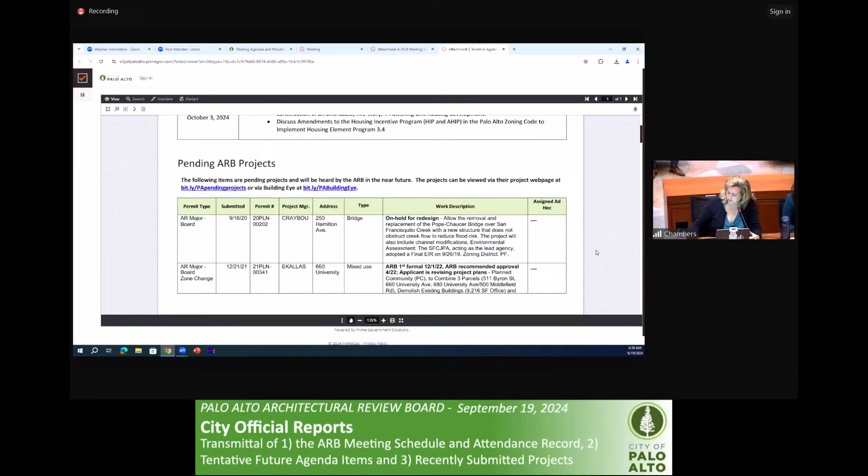On the next page, we have 3150. Again, they have 3 different versions of their project. One of those is a builder's remedy project. And then when you go down to page 9, we have 156 California is a builder's remedy. The next page is 762 San Antonio's builder remedy. So most of these do say builder's remedy in that left-hand column. You also have 3781 El Camino's builder's remedy. The next page, packet page 11, 3606 El Camino's builder's remedy, and 3400 El Camino is builder's remedy.

So we also have 2 projects that have turned in SB 330s, meaning they have frozen the standards for 6 months, and they have the possibility of still filing a builder's remedy. Now, this builder's remedy, the law around that has not been tried in many courts, and so the attorneys are working with City Council to see how we react to all of these individual applications. There could be some different reactions depending on the timing that they came in, because we do have our housing element that was adopted by council April 15th of this year, and then also certified by the state August 20th. So staff and the attorneys are working through that process right now.

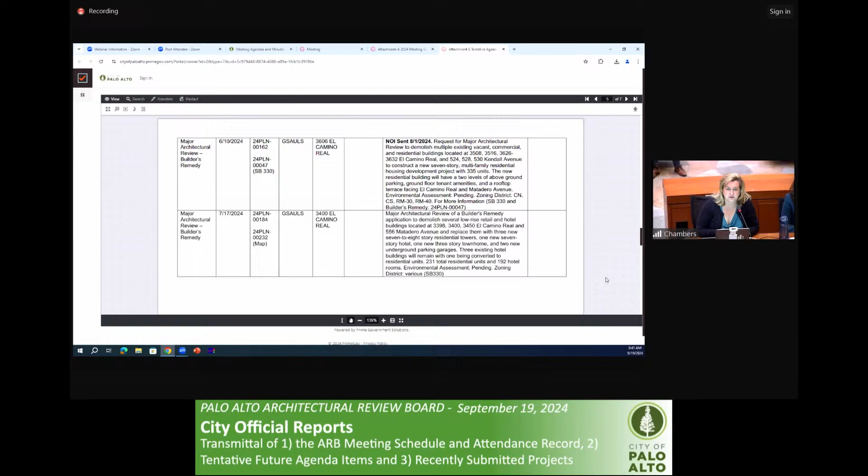That is, I don't believe we have any newer projects. So that's the main official report at this point. Unless there's any vacations or anything like that coming up that you need to let us know, please do so. Thank you. And looking ahead to the winter months here, does anyone have anything that they can anticipate in terms of travel time on the board? Okay, nothing at this time. We'll circle back later, of course.

All right, at this point we will move on to action item, item number 2 on the list. It's 4335 to 4345 El Camino Real. Request for streamlined housing development review to allow the development of 29 3-story attached residential townhome condominium units and associated site improvements on 2 non-contiguous lots. Project would replace existing commercial and motel uses. The project includes 4 units at below market rate and accordingly requests waivers and concessions pursuant to the state density bonus laws. A compliant Senate Bill 330 pre-application was submitted January 24th, 2024.

And we will turn this over to Emily, but first of all, we'd like to go over disclosures. So does anyone on the board have a disclosure they'd like to make?

I'd like to disclose that I visited the site yesterday. Visited the site also, not yesterday, day before. I visited the site as well this week, and we did also receive 2 letters in regards to this project via email just the other day. I disclose I wasn't able to visit the site in person this time, but I passed the site frequently, and also I did the Google Street View this time.

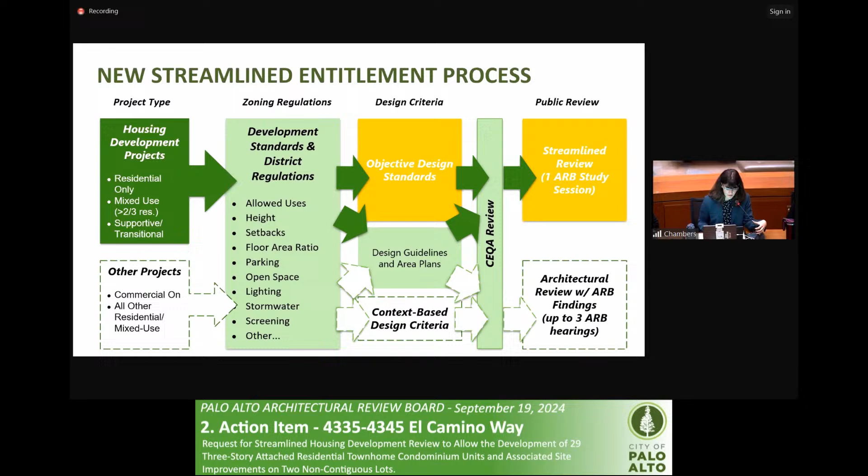This means it qualifies as a housing development project per the state definition, and as long as it meets the objective design standards adopted as part of Palo Alto Municipal Code Chapter 18.24, it goes through the necessary CEQA review. This is the one ARB study session to receive feedback to help the plans with the waivers requested to meet the intent of the objective standards. After this, it is approved as a director's decision.

In terms of the process up to this point, the formal application was submitted in May 2024. It has since gone through 2 rounds of staff review, and a third is anticipated based on the comments received. We're at the ARB study session, and public comments are accepted at public hearings at any time throughout this process.

This project is located on 2 parcels at the intersection of Cesano Court and El Camino Real. Both properties are in the CS Service Commercial Zoning District. The property is essentially at the city boundary with the city of Mountain View and the town of Los Altos. The neighborhood contains other 2 to 5 story multifamily and hotel buildings.

One item I wanted to point out while looking at the vicinity map is where trees are shown at the rear portion of the 4345 property, the larger property. There are 2 pockets of trees which are considered common open space for the condominiums across Cesano Court here. These 2 pockets are not part of this property, which will be more clear on the site plan.

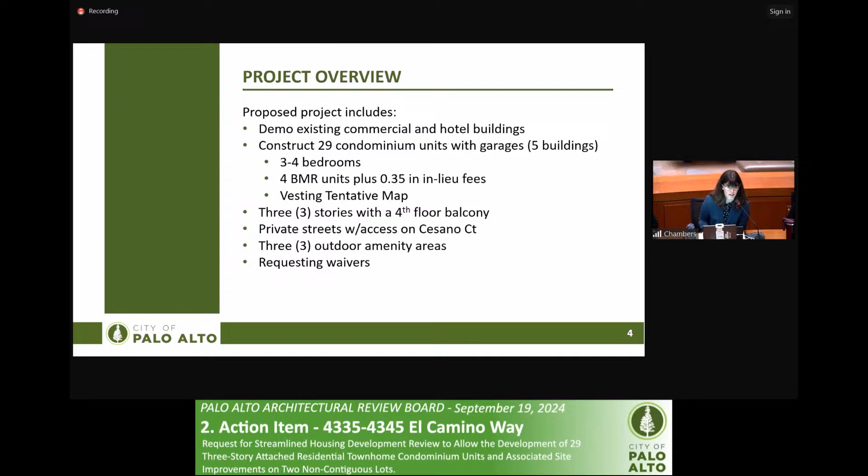The townhomes are 3 stories with a 4th floor balcony deck area for usable open space. The units are accessed along new private streets accessed from Cesano Court. The project also includes 3 outdoor amenity areas, and as a streamlined housing project using state density bonus law, the applicants are requesting waivers to deviate from some of the objective design standards.

Again, this is the site plan showing the 8 units on the smaller side and the 21 units on the larger side. It also shows the shape of the properties, as I was trying to explain earlier.

To give a quick overview of the floor plan and elevations, I'm only showing the largest of the buildings. This is the 8-unit building, showing units having a mix of 2-car side-by-side and tandem garages. The second and third floors have the primary living spaces, and above there are usable open space balconies. These are not considered roof decks as far as the zoning code defines them.

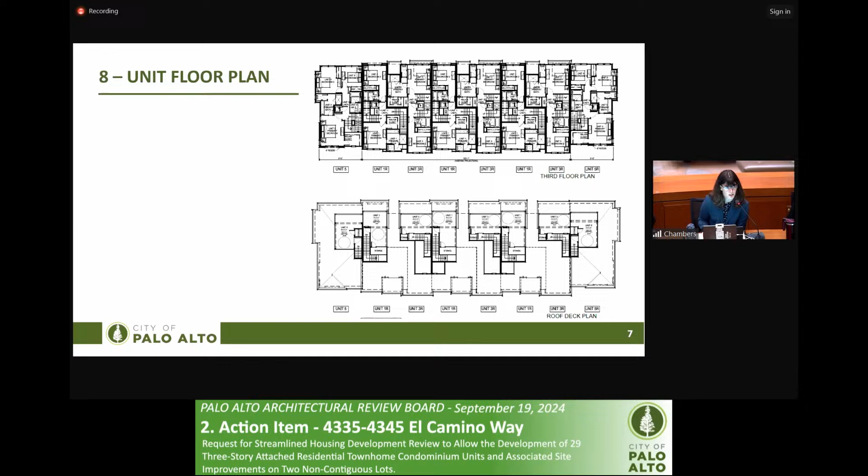This shows the elevations. It meets the base, middle, top, the materials objective standards, as well as the vertical and horizontal shifts.

Three different color schemes are provided for the five different buildings to also provide differentiation.

The key considerations for this project include conformance with the objective standards, and the use of waivers, which are allowed when conformance with the code would physically preclude the construction of the proposed units at the proposed density. However, this project is also eligible for one concession, which is allowed for something that would reduce either the building or operational costs of the project.

As far as our review, because we are still in process, there are certain items that are not currently being met in the plans and are not currently being requested through waivers, but these could either be addressed through requesting additional waivers or by making changes to the plans.

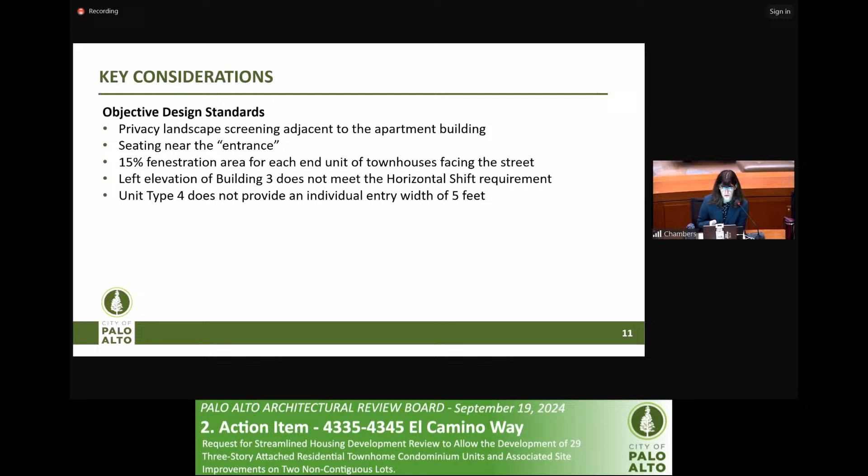This is the list of the waivers requested by this project. The first is to provide no retail or retail-like uses, where some retail would typically be required as part of the retail preservation ordinance.

We have determined that this would not be eligible for a waiver because it does not preclude the proposed density. However, it can be requested as a concession, and that is reasonable for this project.

Next, there is a waiver requested to reduce the side yard setback adjacent to the condominium common space. As I was explaining, some of the trees along Cesano Court that are in a pocket parcel not part of this property would need to be reduced from 10 feet to 4 or 8 feet.

Next, to reduce the rear setback also adjacent to that condominium common use parcel from 10 feet to 0 feet for the refuse accessory structure, and then 8 feet for the actual townhome buildings.

Next is to waive the 30% build-to-line development standard along Cesano Court. There are a number of items along the right of way, essentially the transformer, fire backflow preventer, as well as the driveways, that seem to preclude the ability to meet this standard.

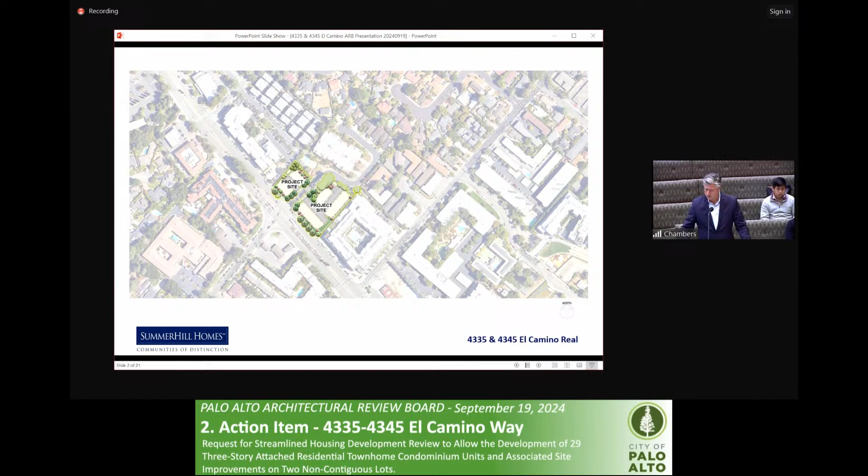It's a contemporary style that combines pitched roofs and classic materials with warm colors that complement the landscape and surrounding context. We've configured the buildings, importantly, to provide an activated, pedestrian-friendly street presence along El Camino and Cesano Court. The front doors and ground level patios face outward toward the street. Vehicle circulation, as Emily mentioned, is provided through 2 entry points from Cesano, and each unit will have its own attached private 2-car garage.

The bike storage for the residents will be in the garages, and there will also be guest bike parking throughout the site on both of the parcels. I want to mention that the private streets will be 32 feet wide, which is wider than you see in a lot of other cities, but that's in compliance with the city's requirement. We did not request an objective standards waiver for that. We'll also have trees planted between the garages to provide some greenscape on that side of the building. All the units will have private balconies and roof decks.

As I said, overall, the idea here is to develop a contemporary urban suburban type of community that fits well with the range of residential densities in the area. Jennifer, if you wouldn't mind coming up and adding a few words about the architecture.

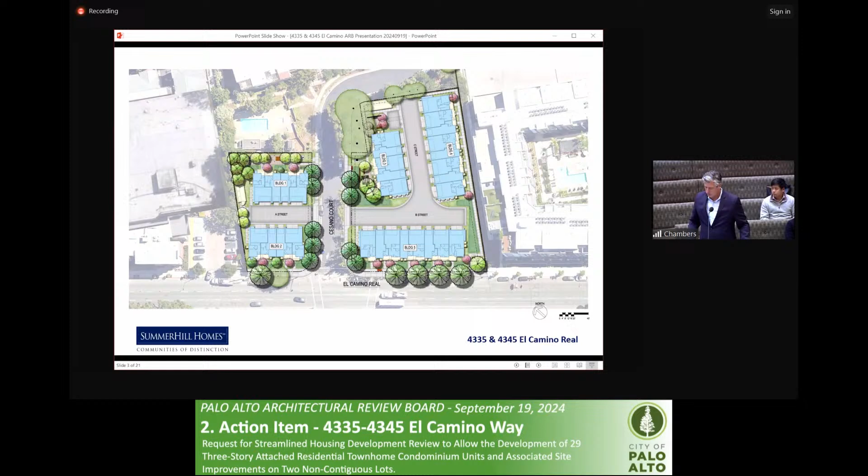Just sit right there. Good morning. My name is Jennifer Master with SDG Architects. Thank you.

As John noted, the townhouse has been designed in the contemporary architecture style. We have used variations in the roof line and massing to provide overall visual interest and human scale at the street level. As viewed from El Camino, you can see the variety in the roof that we have, including hipped roofs, shed elements, and faux dormers at the upper level, again to provide that additional articulation to the street scene.

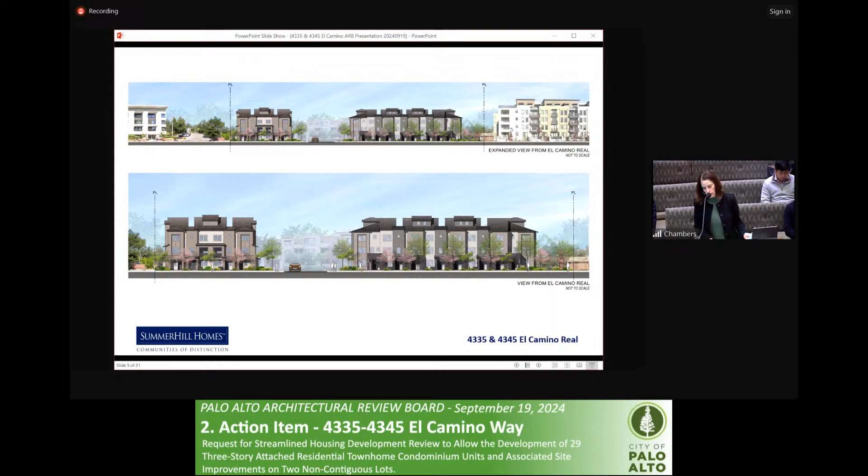The front doors face onto El Camino to engage with the public space, and the front stoops are set back at least 15 to 18 feet to allow for private residential entries. There will be landscaping between the entries and the public sidewalk along the frontage. We will plant public trees along the edge of the sidewalk as well as private trees on-site between the sidewalk and the homes.

The two images on the screen are viewing from Cesano on either side of Cesano Court. Again, you'll see the similar variety in the roof, with breaks in the roof plane and the articulation of the architecture. We have used complementary color schemes throughout the project, as Emily pointed out previously, as well as architecture that engages with the public space.

Here we have the front elevation of Building 5, one of the 8-unit buildings. We have a complementary mix of high-quality exterior finishes, including plaster with 20/30 light sand finish, 8-inch smooth fiber cement siding, smooth fiber cement panels, and brick veneer at all the entries, providing different levels of articulation across the elevations. Our roofing will be composition shingle roofing, and we will use steel and wood railings for the balconies and decks. We will also have wall sconces at the entries. Again, our intent is to combine simple but refined materials with contemporary roof forms and building massing to develop an urban suburban style. With that, I'd like to ask Roman from R3 to talk about our landscape architecture.

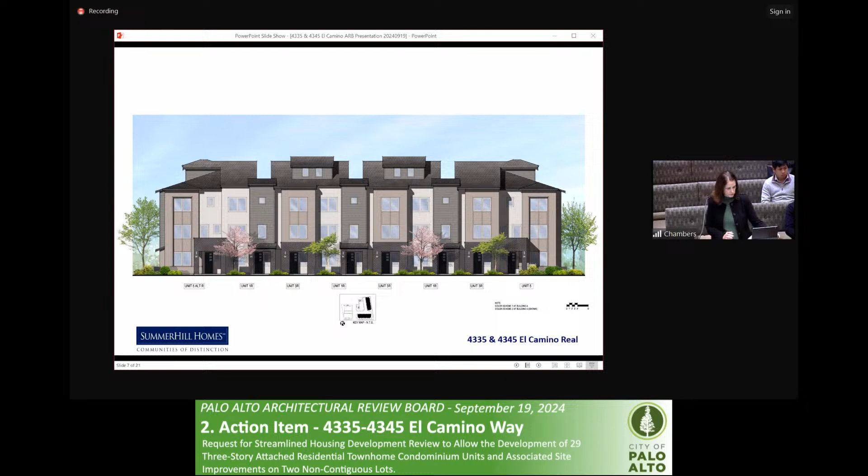Good morning, Roman DeSoto, R3 Studios Landscape Architects, as evident by my green suit. I did want to talk a little bit first off about our proposed plant palette.

One of the things we do when working on a project such as this is try to find a good balance of native and non-native species, low light tolerant species of plants, but also plants that are low water use. We understand maintenance as well, and we're trying to avoid having plants trimmed into hedges and globes and giraffes and things like that, so we try to think about those kinds of things after the fact as much as we are initially. Also screening of the sides of buildings, screening to provide shade, screening to provide undesirable views, and then of course the retention areas. There's an image on one of your sheets about how we look at that and try to make it actually look very presentable as opposed to just a leftover space. Those are important things when thinking about plant palette and how we want to see native and non-native species work together.

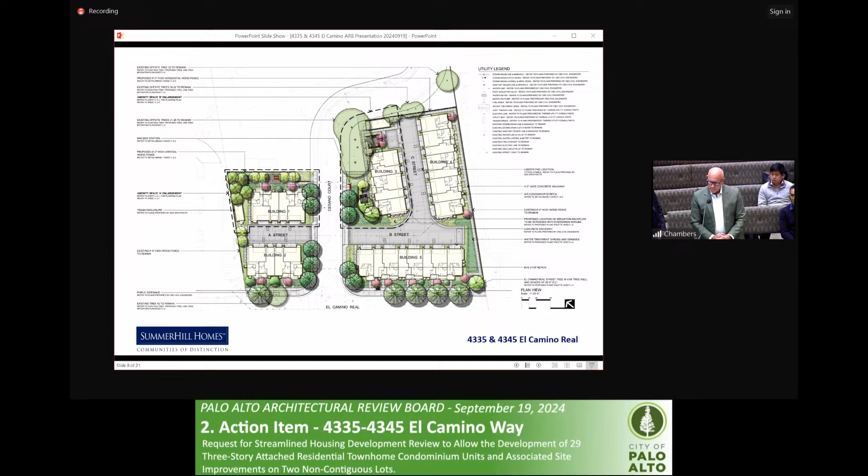The first thing I'd like to talk about, in addition to the plant palette, is the amenity space next to Building 1. In this space, we tried to create a small outdoor area that has several uses, enhanced by a textured treatment of concrete, an electric barbecue counter, a communal table, string lights, and a conversation area with a table. In and around that would be a lush planting of native and non-native species. We understand this portion of the site may get a little bit of shade, so we're very cognizant about what types of plants we would propose in this area.

The second amenity space next to Building 3 faces Cesano Court. This is an area with a pergola, seating area, tables, modern Adirondack chairs, and lounge seating. Out in front, we're proposing some specimen trees, such as native California oak trees.

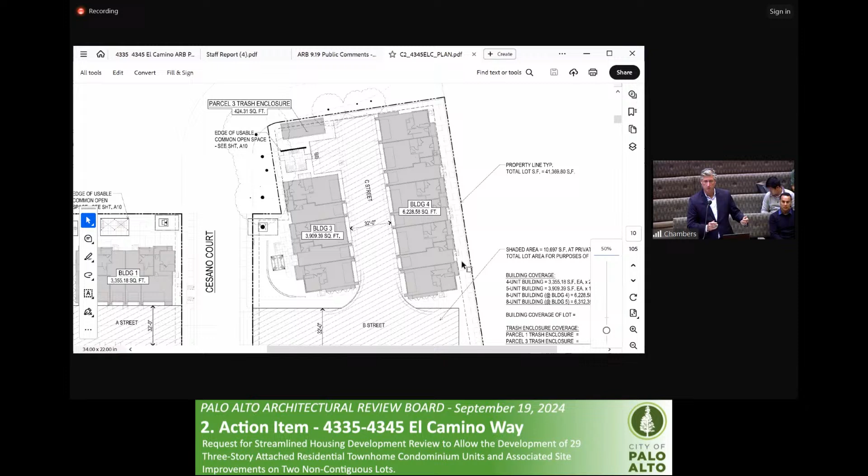Certainly, give me a moment to pull back up the shared screen, but I can answer in the meantime. It's actually an ordinance requiring 32-foot wide private streets in Palo Alto, and the measurement is taken from face of building to face of building, not the travel way itself. That 32 feet includes the driveway apron or garage apron. So on that note, is there a sidewalk along there as well, or is it decorative paving? It's not decorative paving, and it's not intended to be a pedestrian route there.

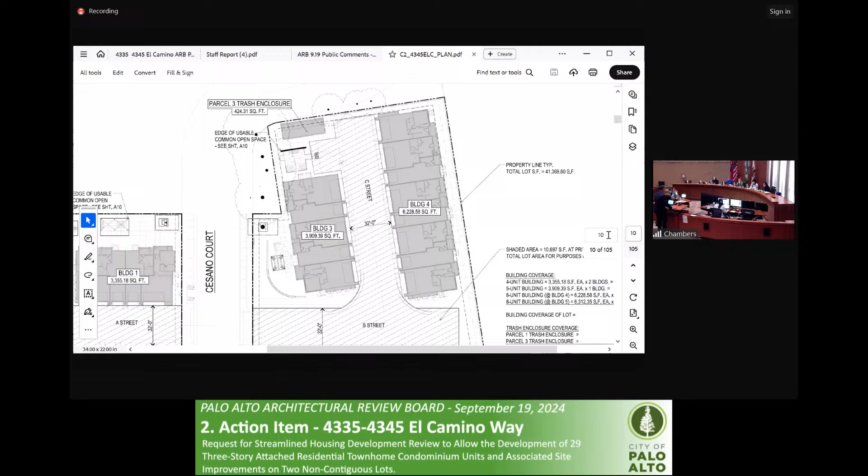Sorry, give me just a moment, I'll see if I can pull that up. Emily has it up on the screen already. Oh, great, feel free to point out what we're talking about here. Actually, if you could go to sheet L1.1, or an even better sheet, it's hard to say, I'd bet somewhere around sheet 80.

These are the street sections. Yeah, that's fine too. So this is actually taken from the joint trench sheets. Were you able to find that helpful? Yeah, actually that was pretty helpful.

The intent here is that the front door is faced on the opposite side from the alleys and from the garages, so we want pedestrians to think of the front door as the pedestrian side. The streets will be 32 feet wide building to building, but there's not intended to be a pedestrian side of the building because there isn't a pedestrian entry on that side. These are not designed as what Mountain View calls townhomes, where the garage and front door are on the same side of the building.

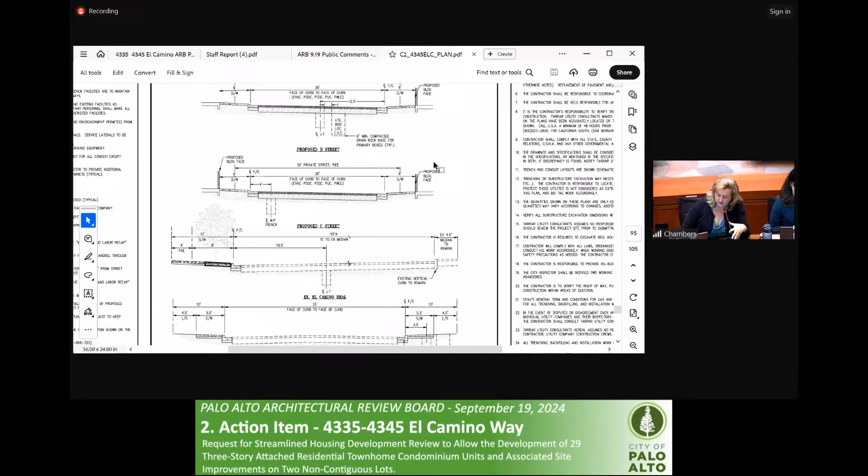Can you repeat what the requirement is? The requirement's coming from the code for private streets, and this was a voter initiative that was put into the code. It says that streets serving 5 or more lots shall be no less than 32 feet wide. So it's just meeting code, not planning asking for anything more. Okay, thank you for clarifying that.

May I ask, I think staff's interpretation has been that 5 or more lots includes condominium units, because we're actually just 2 single lot subdivisions here, technically, with multiple condominium units on each.

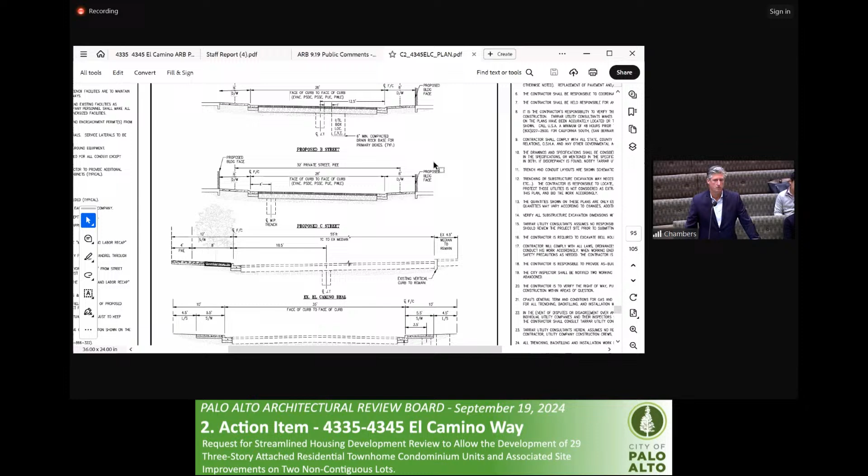Regarding the condominium, I have a related question. I have not seen this kind of jigsaw puzzle setup of plans before. It was very interesting, so thank you for doing that. But it seems like 2 units have stairs that are kind of stacked. How does that work? This isn't really a planning question, just for my education, but how does that work in terms of lot split in a condominium or townhouse?

Well, the condominiums are defined by the condominium plan, which is basically an airspace condominium. In that sense, it's no different from a stacked flat condominium where you have multiple levels of units over each other. For the most part, because there's a lot of demand for this townhome style of living, where nobody lives above or below you, we try to keep them side by side as much as possible. The reason we have this slight overlap in the stairs is actually to accommodate Palo Alto's specific requirements regarding the amount of space needed for bikes and other storage in the unit.

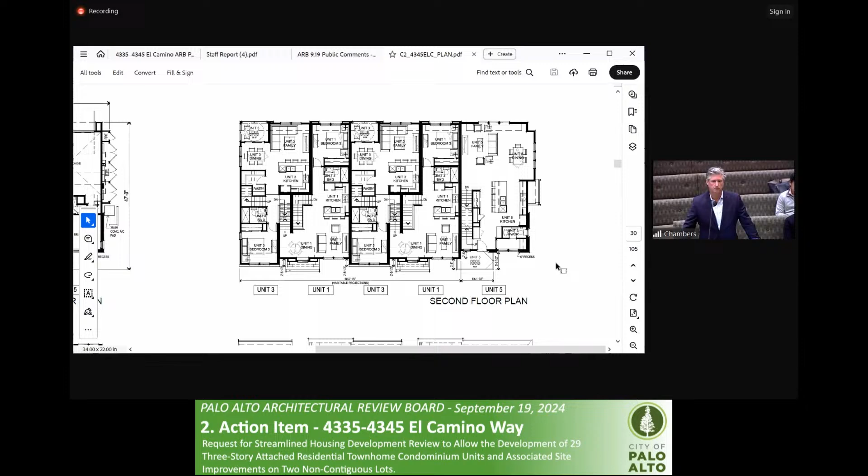So legally, it's going to be a condominium, not a townhouse. Got it, exactly. And that's why I mentioned it's technically 2 single lots, but each individual unit is defined by a condominium plan, which will be developed. The way the process works, it gets developed during the improvement plans and building plans, and gets reviewed by the Department of Real Estate. Sounds good, thank you. I have many other questions, but I'll hold for others to ask theirs.

Sure, I'll jump in here for a moment if you don't mind. Emily, would you mind pulling up the site plan, please? Beautiful. So I wanted to go over some of these waivers that we are looking for. So the concept of the retail and no retail.

Understand that. So the one thing I didn't understand is it does seem that with a townhome style of architecture, it would preclude additional units. Isn't that correct, though? So I'm wondering why it wouldn't work as a waiver and we'd have to make it a concession instead. I just want a bit more clarification, because I'm thinking the waivers would make it so you can't build the density you're looking to build, but with a townhome, you can't have the whole first floor be retail, because that would preclude the amount you could build. Is that correct, or am I misunderstanding?

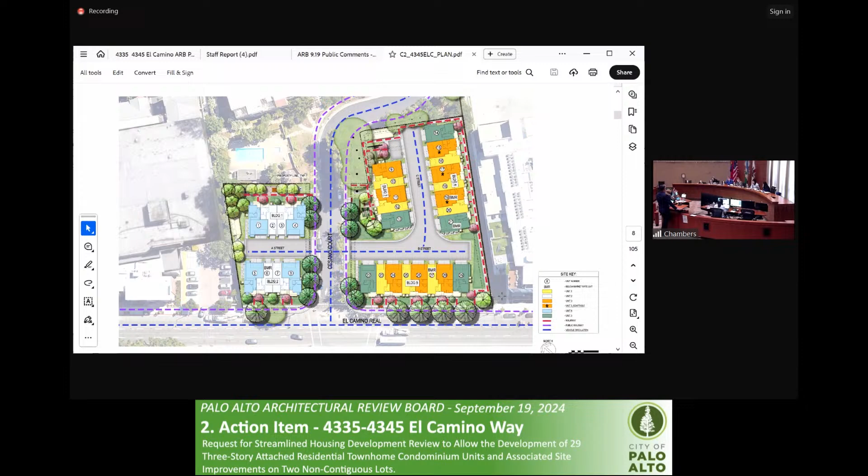It's my understanding that it is the density, the number of units, rather than the architectural style of those units. Okay, so it would be possible to waive the retail under a concession, and they're allowed to have one concession. Yes. Perfect, okay, waiver number 2, side and rear setbacks.

Just to dive into this a little bit, something I noticed, and I don't know how to zoom in here, but I'm going to do my best to draw all over your thing here. So part of this is that the setback is reducing the side yard adjacent to the condominium use from parcel, from 10 feet to 4 feet 8 inches. That's on this side here. I realize this isn't the site plan that has the dimensions on it, and I should be on this page. Perfect.

I just want to go over these setbacks, because it felt a little confusing when we were talking about it. This here, the trash, is looking to avoid the setback, but it's a low structure at 6 to 8 feet tall, versus this condominium only asking for a 2-foot concession. So the tall building is here, but this one, the trash, is the one that wanted to go to the 0-foot setback, and that's at waiver 2B. Is that correct? Yes. Okay, perfect.

And then 2A, sorry, I'm jumping around a little bit. It's to the left here. So this one, just for this portion right there, would be reduced back, and it really is the front porch. Actually, right there it's the 4'8", and that's to get to the front porch. Is that correct, or is it coming all the way down here? Yes, it extends just slightly further than where you had drawn that. No, yeah, that's correct. Okay, and on that note, the reason that's 4'8" is because of the street on this other side, so that all makes sense.

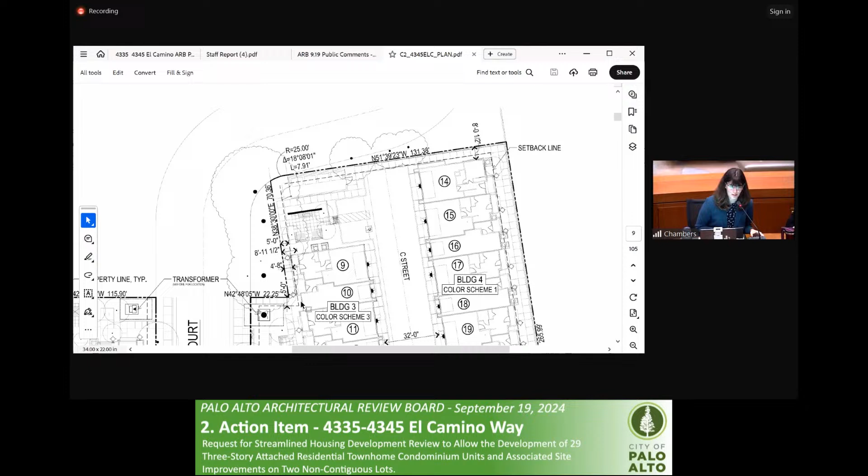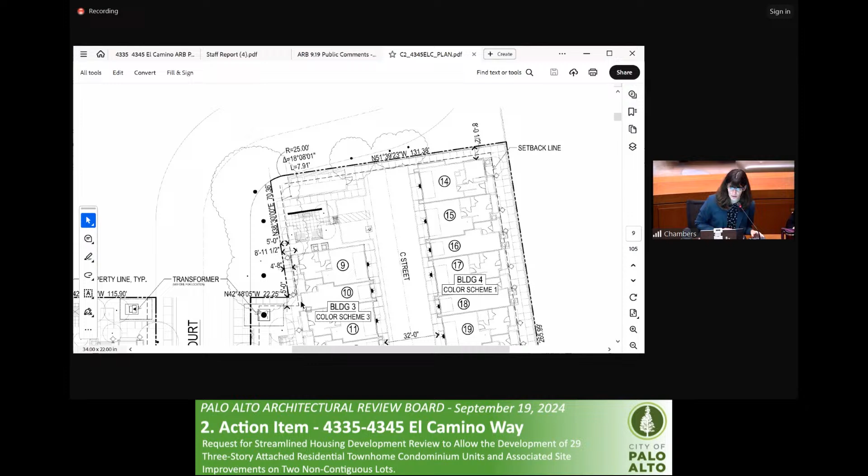Got it. Is there any possibility that in the future those two slivers of parcel could be sold independently? It's my understanding that it would require unanimous approval of all the condo owners. It would also potentially bring the project out of conformance for their usable open space requirements. I haven't looked into that. Not a problem. So just in the foreseeable future, that will always remain landscape. So having a 4'8" setback here is really from a landscape sliver of an undevelopable property.

Yes, there is a fence there, so that is something to keep in mind. Chair, may I interject for just a moment on that point? Please, go ahead. So the fence is actually part of our site, so that would come down. And yes, we've looked at this issue. Not only would it raise the issues that Emily just mentioned, but it would actually require a subdivision map or parcel map to create that as a separate legal parcel, and it would be a non-conforming parcel, so you wouldn't actually be able to create it as a separate parcel for individual sale.

Got it. So the only property that would ever want to buy this sliver would be you guys. Yes. Okay, got it. Still staying on the subject of these setbacks, so that's there, okay.

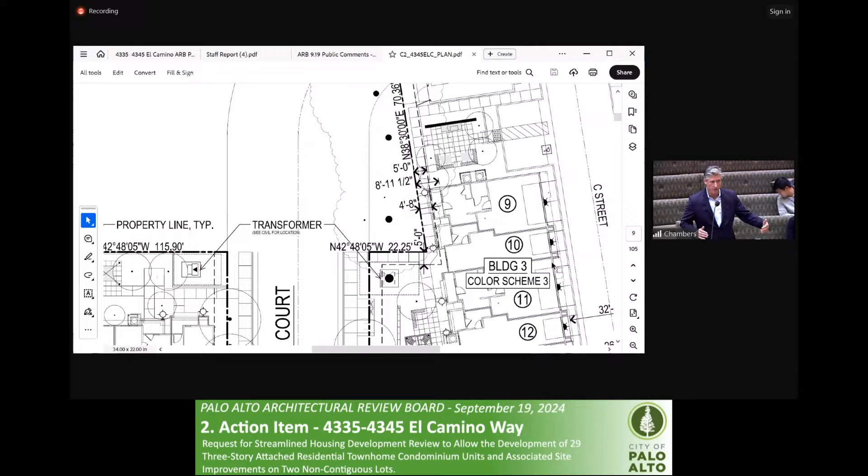And then the large bulk of this here does appear to be at that 8'11". Is that accurate as well? So as the building steps back, does it get up to this 8'11" here, or am I misunderstanding that? I'm looking at the applicant now. You're looking at which portion? Thank you for zooming in, Emily. So it's got this 8'11" setback here, and I'm trying to understand where exactly that's going to. Is that the sort of bulk facade of that building? I'm going to look to Jennifer on that because I think she's checking the plans right now. But yes, I believe that's the case. So what you're seeing there for the 4'8" is the ground floor, the stoop, but then the second floor and third floor are stepped farther back.

Okay, thank you. Let's see, and then Emily, I'm going to jump over to waiver 3, that 30% build-to. Could you please explain that one a little bit more for me? I want to make sure I've got that covered.

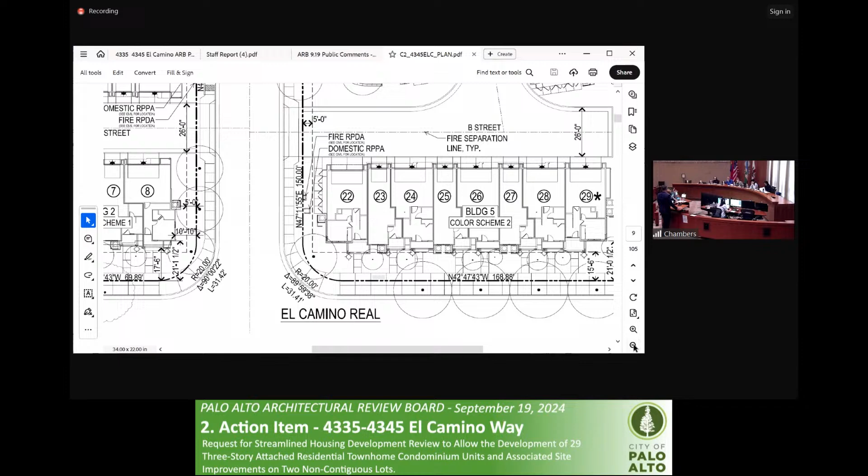Yes, I'm moving the plans around.

Along Cesano Court, for this property on the right side, normally there would be a 30% build to the setback. But on this side, the amenity space is here, then the driveway, and then there's fire and other equipment, the transformers too, all over here. That's in the way. Probably better to have that on a streetscape than tucked somewhere on the private street.

Again, on this note, if you scroll back up just a bit so we can see the end of Street C. So there's no possibility for driving through here because that would cross this little area of land right here, so this could not be a through street. It has to be a dead end.

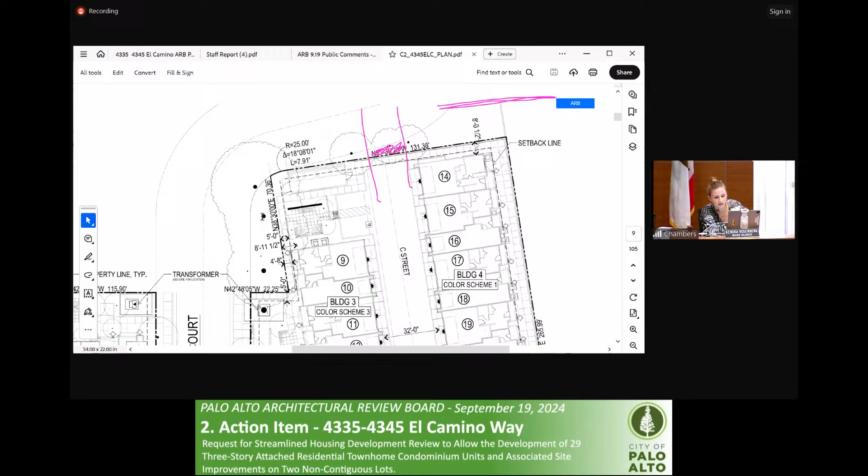Correct. And on that same note, there's a bike path coming from somewhere over here, which was mentioned in public comment, that they would like to see this bike path here. But that property is not owned by this applicant, correct? Correct. So both of those are out.

Just a second. About that through street, you mentioned earlier that the fence is part of this property. Did you say it was going to be removed? Was the pedestrian part of that going to be accessible from Cesano Court? No, I believe we'll be installing a new fence along there.

I think we have a sheet that actually shows the fence line. If Austin, if you're able to find that in the plan set, we can reference it. So that, because of that proximity on the front of building 3, we don't want to build a new fence there, because that would be a fence right outside your front stoop. But we will have, for privacy and safety, a fence along the, I'll call it the north and east side.

And it will end in the upper left corner? Yes, that's right. The fence will extend essentially over to just about where the trash enclosure is. There's actually a very small portion of our site that does have frontage directly onto Cesano Court - that little tiny bit there, which works well because that is going to be the pullout location. We've talked to Waste Collection about this - that's going to be the pullout location for the bins that are in that trash enclosure.

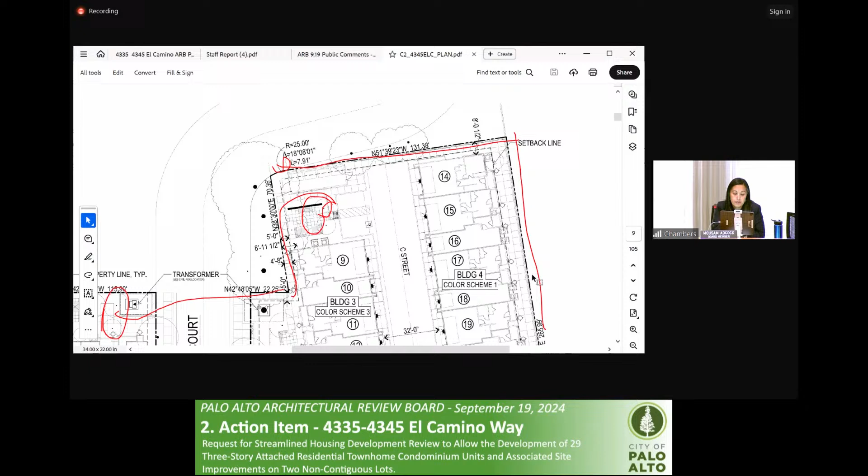Part of my line of questioning here is about the shared amenities you mentioned at the end of your presentation, the outdoor spaces, because on the two properties they're similar but a little bit different amenities. So presumably people living on this side could cross over and use that barbecue area, kind of jaywalking across the little court? Yeah, that's exactly right. It'll be a single HOA serving the entire project, but because of the separation of the public street in the middle, we wanted to make sure both sides of the street had some on-parcel amenity spaces, though they're welcome to use the amenity spaces on either side.

In fact, the mailbox kiosk is located on parcel 3. You might wonder why I keep referring to parcel 3 rather than parcel 2 - it's because the parcel map that created these parcels defined them as parcel 1 and parcel 3, so for consistency in my mind, I continue to refer to them that way. Thank you.

Just a quick question on trash collection - you mentioned on parcel 3 the trash bin will be pulled out from that corner. What about parcel 1, because it's a little bit further? Yeah, great question, so let's go over to that for a moment. We've actually had extensive discussions with trash collection services about this.

So what we're doing here is we've got the trash enclosure, as you can see, and the carts will be pulled out, the bins will be pulled out and taken to the street. There's actually, just to the side of building 1, a couple of hashed marks - that's the ADA marking there, because there's a little ramp down so those bins can be pulled out and put onto the street right there. And the HOA is going to be paying an additional pull-out fee to Waste Collection to pull those out and then push them back in.

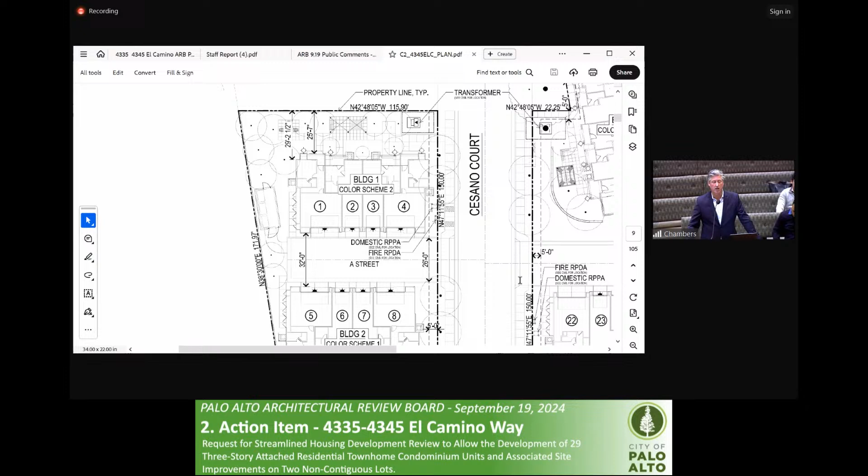For townhome and for-sale product, it's very different because you don't have on-site staff. You have an HOA manager and a landscaper that's hired, but the landscaper isn't there every day. In the past we've preferred to let residents keep their bins and carts in their unit or garage, then pull them out for collection right in front of their unit. But the city isn't allowing that anymore, which is why we're doing the trash enclosures.

Thank you for the clarification.

The last two waivers I want to go over as well. Waiver 4 is a waiver or reduction of development standard to reduce the number of street trees. I'm looking at the landscape architect here — can you explain where the street trees are that are being added, and why you think you can't get those last few in? Come on up.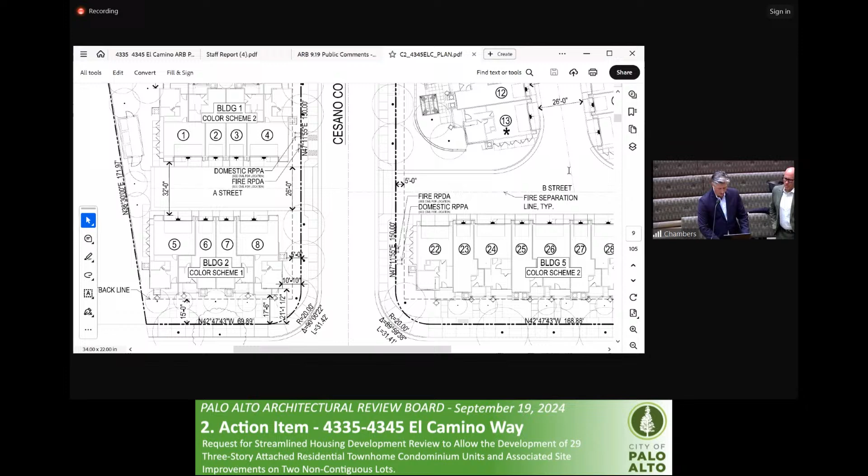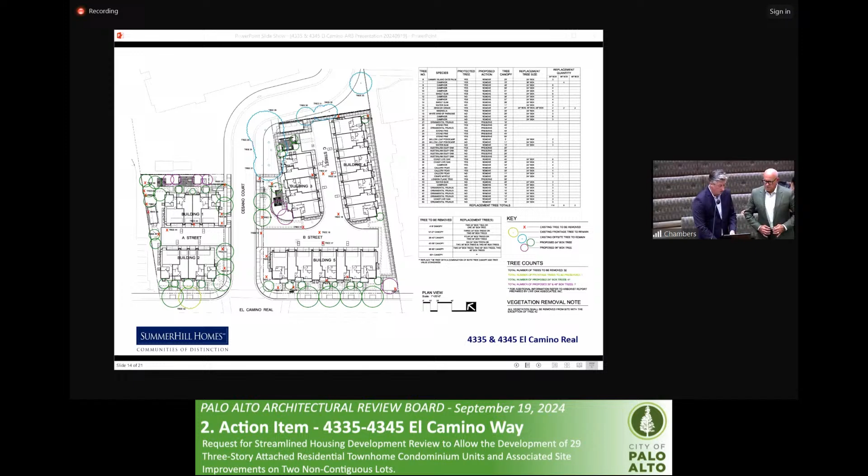I can help with that too, because I've actually got a slide that'll help illustrate that. Do you mind if I share my screen for a second? Please. Why is that not sharing? There we go. Okay, give me a moment here. I'm going to scroll down — one sheet we want to see is this one. Or even the colored, rendered ones. Yeah, that's fine too, we can go to that.

The easy answer is that due to the amount of utilities, but also the water treatment area and the storm drain line that services those water treatment areas, especially along El Camino — those small purple trees there are pushed back to clear the storm drain line. We were hopeful we could push them forward to count as street trees, but based on the impacts that treatment area would have closer to the building, that wouldn't work.

We tried to fill in as many spaces as possible with street trees, so we're counting some that may not look like street trees. The one to the far right in that lower corner is 6 feet within the sidewalk, so we're counting that as a street tree. Everything else along Cesano, those larger green trees, those are street trees. And of course we're saving the one — I believe it's a platanus — out on El Camino in front of building 2, and adding another one there. Street trees along that area are at about a 25 or 30 foot spacing, so we've done our best to avoid existing utilities, street lights, etc.

To clarify, that is one additional tree. At the time the staff report was published, we weren't sure if the one in the bottom right corner was 6 feet away from the sidewalk or not, but now that it is, the deficit is 4 trees rather than 5.

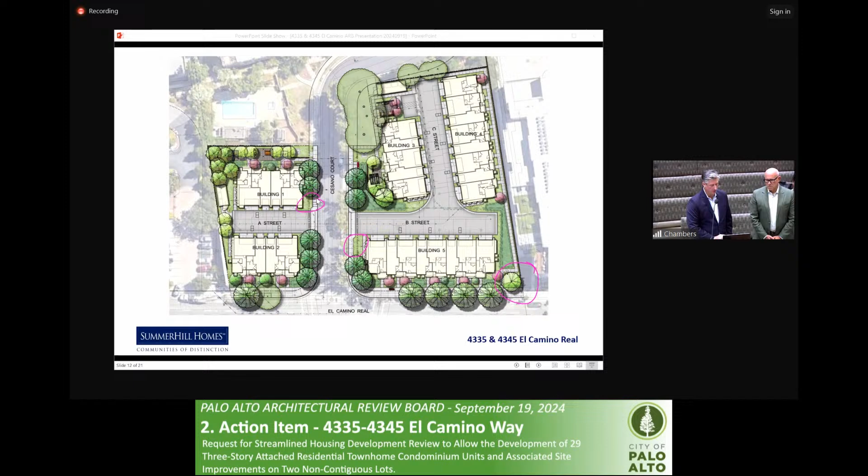Understood. Okay, thank you for that clarification.

And then waiver 6, reduce restrictions on windows and balconies adjacent to residential buildings. It sounded like for those corner buildings, the amount of glazing was basically being added up and then divided overall instead of being 15% per building. So those are 2 separate waivers.

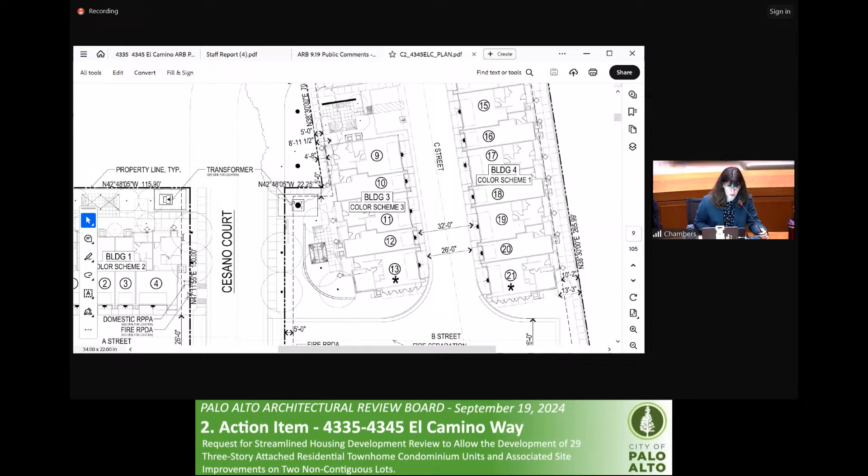The 15% glazing is for — here, let me share the screen again — that's the one that wasn't covered under a waiver at this time, is that correct? Yes, but also those are for the ones facing Cesano Court primarily, whereas the privacy waiver is for building 4 facing the apartments. Understood — okay, yeah, there isn't a privacy issue there. Let's tackle these one at a time then. So waiver 6 is the one across from building 4.

Is that correct? So waiver 6 is in regards to building 4's privacy because it's butting up against the other apartment complex. Yes.

Excuse me, may I speak briefly to the 15% one? Please. Yeah, so this is one of the ones that we discussed with Emily last week, and when she pointed out to us that the 15% requirement needed to be met with regard to each of the buildings, not as an average, we're taking a look at that again. I think we're pretty confident that we're going to be able to address that one. Excellent. Okay, perfect.

And then, so this one is the restrictions on the balconies adjacent to the residential buildings.

Emily, just for clarification, I'm trying to make sure I'm understanding. So waiver 6 is in regards to the one at building 4. I don't have the list of waivers in front of me to know how they are numbered. Sorry, it says waiver 6, reduce restrictions on windows and balconies adjacent to residential buildings.

Yes, that's correct. And so that is for building 4 facing the apartments, which are within the city of Mountain View, but we are still considering obviously a residential use for the objective standard that requires privacy, glazing, landscaping, other measures when it is within a certain distance of other residential uses and has primary windows that are facing that direction.

Perfect. And just so I'm understanding as well, this setback here of 10'2", they're in compliance with that setback. That's an acceptable setback. They're not asking for a waiver there. They're not closer to the property line than they should be. That's correct. Okay, good. All right, I have gone over the waiver list.

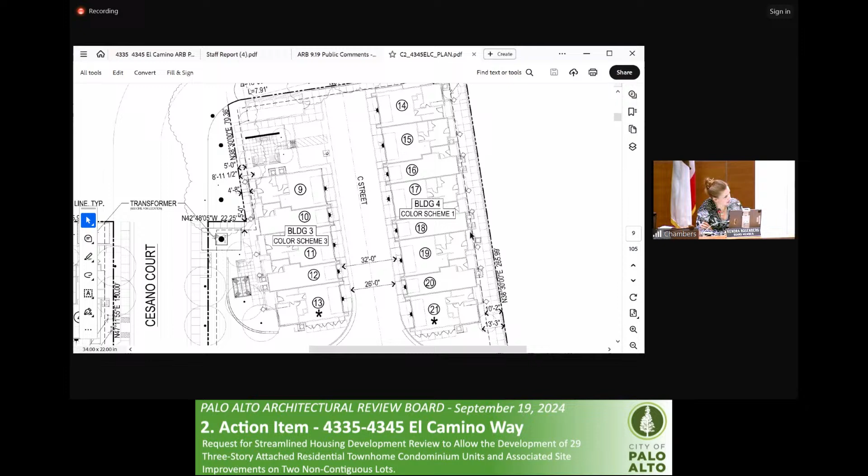I would like to let someone else have a turn to speak as well, so instead of hogging the microphone here. So Yingshi, did you have something? Yeah, can I have a follow-up question on the waiver 6?

For the proposed building, it will be like 10 feet or so away from the property line. Do we know how far away the apartment is from the property line on their side? We actually, it's the distance from window to window, is very close to 30 feet. We haven't actually gone out and surveyed it to get the exact distance. Based on aerial, we have an estimate, but that hasn't been verified with a ground reference. And actually, if you look at the approved entitlement plans for MV for that apartment building, it shows it as being actually a little bit more than 30 feet from window to window.

So you mean like for the upper floors on this property, like second floor? Yeah, second floor. So it's very close to 30 feet. It may be a little bit less than 30 feet, it may be a little bit more than 30 feet. We haven't verified that yet. Gotcha. And as you know, the standard is if you're within 30 feet, that's when the requirement kicks in.

Sorry, there's also a requirement within 40 feet. I don't want to dismiss that, but that's a separate requirement. Gotcha. And another question about the site plan is the bench requirement. So Emily, maybe could you please clarify the requirement for the location and how it works?

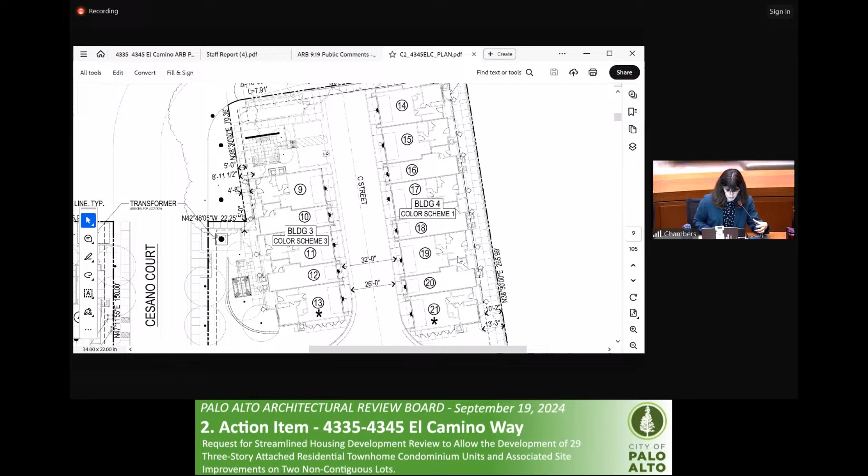Or maybe the applicant. No, I'm going to pull up that objective standard from the code. Board member, if I could, this is another one that we weren't aware of this requirement until late last week. So we haven't had a chance to take a look and see whether we can comply with it, but I expect that we can meet that. In fact, there's an existing bus stop bench out there right now, so among other things, it would be helpful for us to hear exactly what the requirement is, but I suspect we may be able to address that.

Okay, and just to my fellow board members, that list of items that have been identified as additional standards the project does not appear to comply with, that have not been asked for as waivers, is located on packet page 23. The waivers were on packet page 21. And then if you flip the page to packet page 23, then there's that list of additional items, which again, we understand you didn't get to last week and many of them you guys are going to be tackling on your own, but we do want to cover them. We appreciate that.

And we appreciate the clarification on that too. So this is in the attachment that goes through compliance with the objective design standards, on packet page 41. I've also pulled up the full text as it's written in the code. It states the primary building entry shall provide at least one exterior seating area or bench within 30 feet of the building entry or path leading to the building entry.

We've discussed that for this style of development, there isn't really a primary building entrance compared to when it's an apartment building. And I think we can also maybe take a look at if the amenity space that's closest to Cesano Court would also qualify. We're still looking at it.

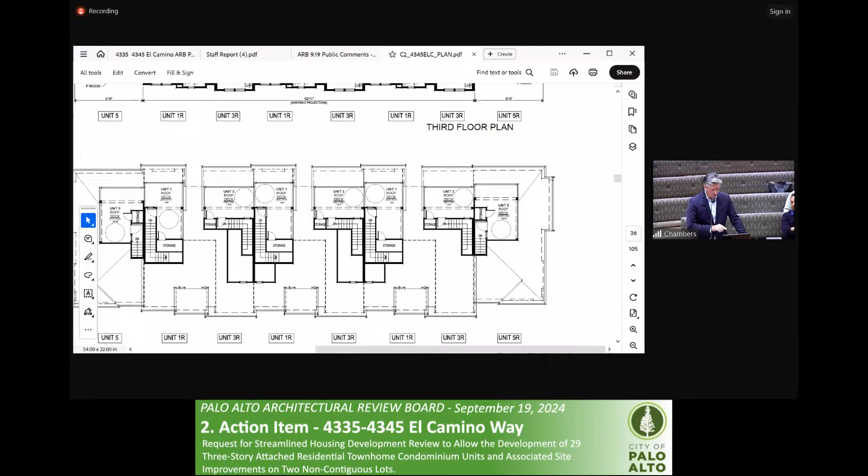The top floor, the 4th floor balcony is partially covered. You can sort of see the edge of the roof line there, it's the double dash. Do you want to go ahead and explain? Yeah, so it's really an attic space. It's not conditioned. It does have those windows that would be blackened glass, but it's really unconditioned attic space up in that shed area. How tall is it at its height?

I don't know, maybe 5 feet. I don't know, I'd have to look into that. I think the section on sheet A18.1, could we go there?

I'm trying to understand where this even is. Is it that window on the left? Yes, actually, that is correct. And so what is that space where the cursor is right now?

So again, it's really part of the roof structure. It's not accessible space, it's not usable space. You can't get into it. But it does appear to be 9 feet, 1 inch here, tall. And you could put stairs.

Yes, sorry to interrupt you. It really has to do with how that roof ends up being framed. I could see that dormer part being framed on the lower roof below.

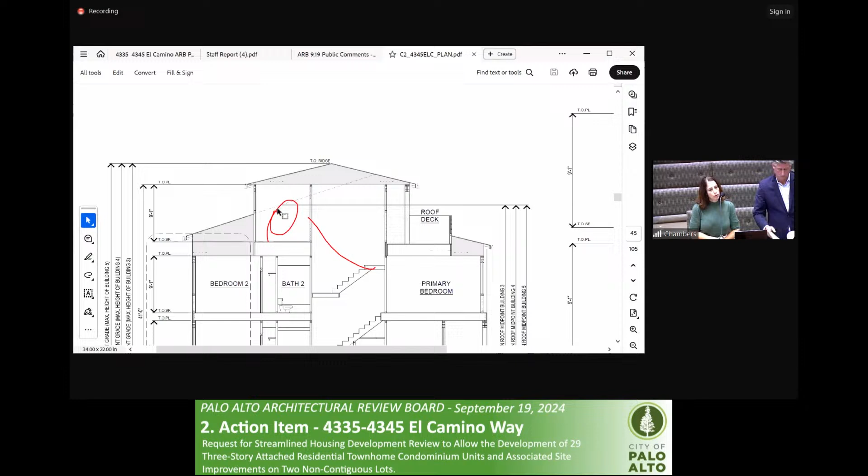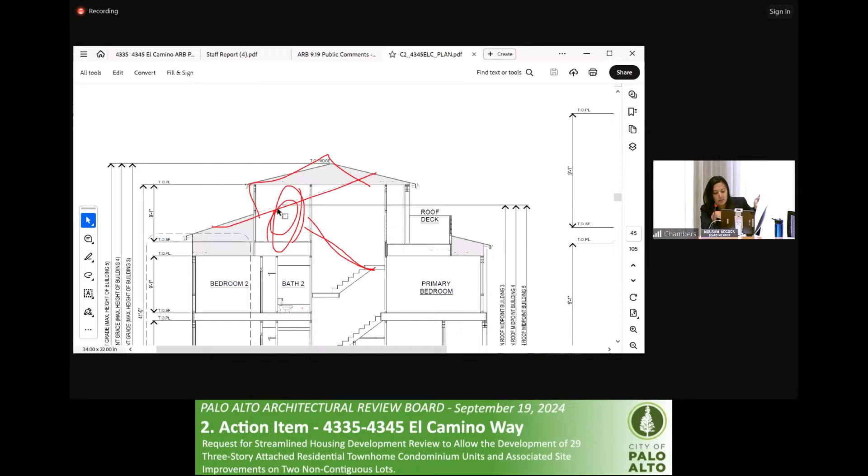So this is the main roof, and this is the little dormer. Exactly, which is creating this space, which if I understand, there's some nuances to it in and out of the page. But presumably you could have a ladder and have a storage space up there. Is that true? There wouldn't be, I mean, you'd have to have an attic access to that space, but it's not going to be designed structurally for anything to be stored up there.

Emily, if I'm understanding correctly, attic spaces are required to be 5 feet or less in height. I don't know if that only applies to single-family houses. Okay, yeah, they also need to be accessible if we were going to count them otherwise. So you can build volume that's not accessible and have it not count.

I know this is a tricky one. I want to make sure we shouldn't be having void spaces. No, traditionally in town, this is allowed when it's up on a third floor that's not accessible. We've seen it many times on attics of houses we build with a pitched roof. You have a void, it's taller than 5 feet, but it's for all practical purposes inaccessible. There's no way a person could get there shy of using a ladder. So the planning department has not included this as an FAR calculation space, which is what you're driving towards.

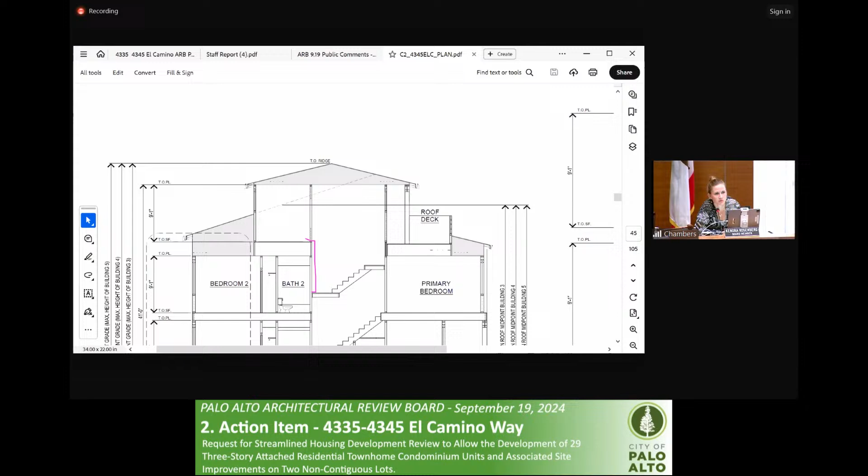A little bit, and I'm trying to make sure that I'm understanding whether it's FAR or not. And additionally, if the volume's being built, then I guess the secondary question is why not use it as attic space? Wouldn't that be an amenity for the people living there? I understand that this falls under FAR rules and regulations, but put a ladder up there and then all of a sudden you've got storage space for the people living in these condominiums. That would be a benefit. But why don't we wait and see if it survives our critique first? Thank you, I suspect it might not.

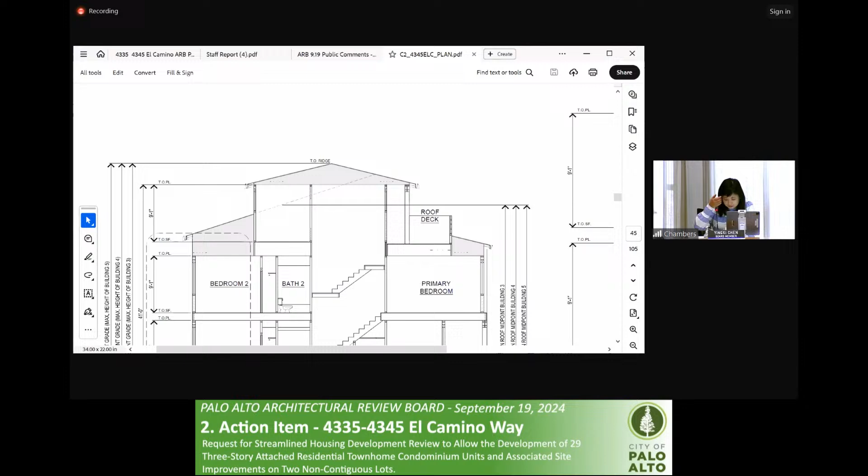Other than this inaccessible space, I also noticed there are some other spaces. It seems like it takes lots of areas. For example, if we go to sheet A15, the floor plan, the first floor plan. Yeah, on the first floor, just A15. Yeah, so if you see, could you please zoom in on the first floor plan on upper left? If you see, there are several areas like this which count towards FAR, and what are they?

Are they accessible? It's not, it's just a projection on the outside of the building to create articulation at that porch. But that area does count towards FAR, is it correct? I believe we have included that, yeah. So if you put a door from that room, you could have a closet. Yeah.

Potentially, yeah. Would it fit a hot water heater or a furnace? From the interior, you mean? Yeah, because if we switch to sheet A15.2, it does include it in the FAR, I think.

Yeah, we've included it in the FAR. We can certainly take a look and see whether structurally we can allow a door there. We do have some shear wall constraints that may preclude that from being used as a closet space, but we can certainly take a look.

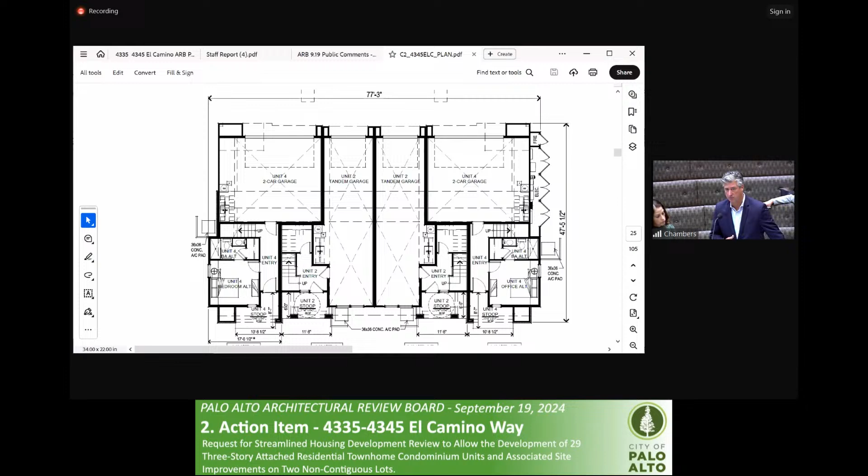On the roof plan, could you please talk a little more about your thoughts on the different roof slopes? We see 4 in 12, 3 in 12, and also 5 in 12. Is there a particular sheet you want to see? Just the next one.

So we did extensive work with the fire district on accessing these buildings for fire purposes. The 3 in 12 you're seeing coming from the rear side of the building was a request from fire so that they're able to access the rear side of the building with their equipment if they need to get up on the roof. And then similarly, as we came back around the front and up to the highest points of the roof, they had requested a 5 in 12 maximum slope to get up to that upper deck roof over the deck space.

Have you done a section study cutting through these 3 in 12 areas? Because on the elevation, it seems like the upper portion already goes to the lower, it's like only 3 or 4 feet above the 3rd floor, but there are still bathrooms below. How does it meet the clearance requirement for the bathroom?

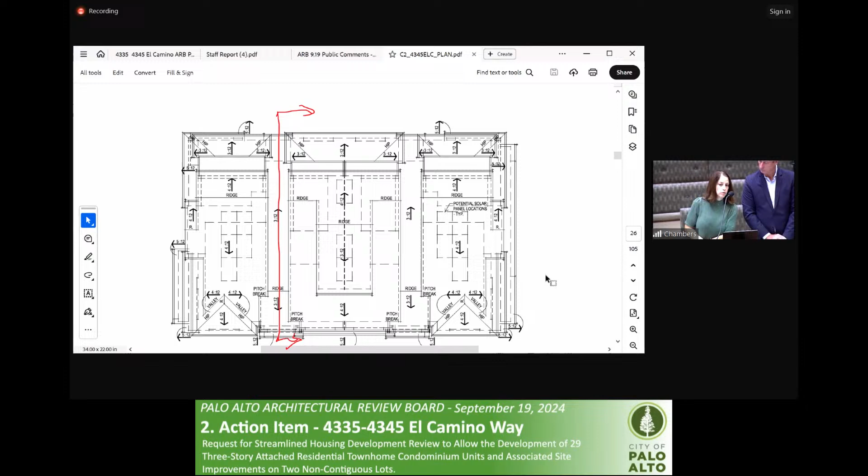I don't think it's included in our section study within the packet, but we did look at that. There is a part of the roof that is lower than the rest of the roof in that bathroom, but it does meet code requirements.

Just to help you out, the elevation on sheet A15.4 I think helps with understanding how that 3-12 comes down on the rear elevation to about halfway. Yes, those spots, rear elevation, correct. And that's, as I mentioned, per the fire access request.

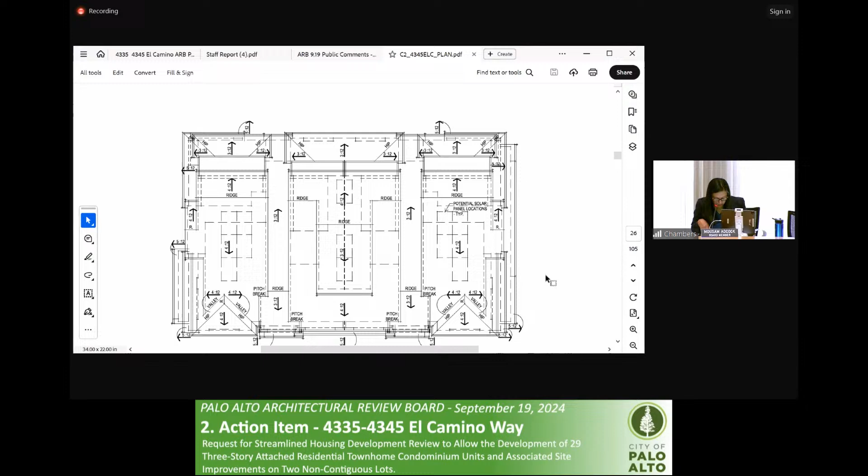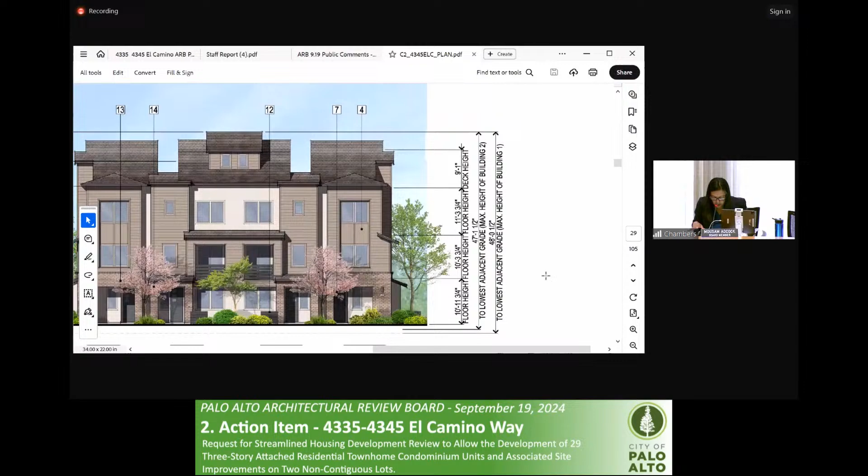But generally, overall, you've got the 3-12 for most part on the front and the dormers in the back, and 4-12 for the majority, but then you have this condition of switching from 3-12 to 4-12. If I look at 16.1, we're still in the questions portion, but it seems like your slopes are making framing more complicated than it needs to be.

Where's the transition you're talking about? Like here. This is 4-12, this is 3-12. You have that hip doing something different than that hip. Oh, I see the transition around the corner there. Yeah.

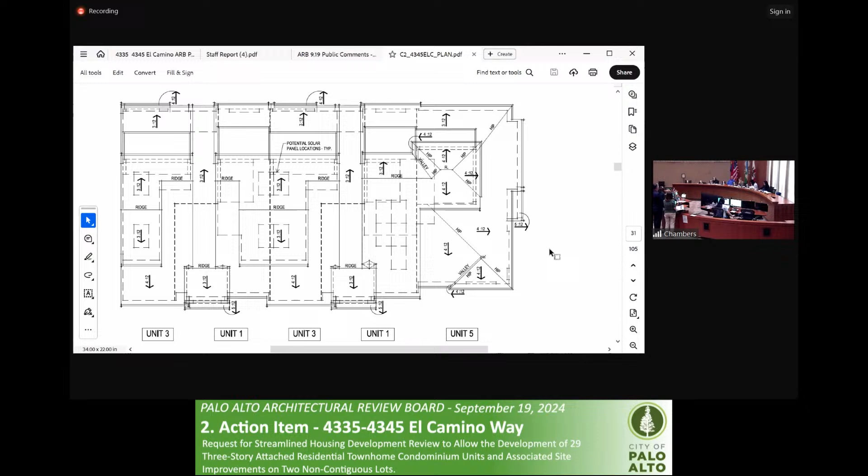Sorry, I jumped in on your comment. Yeah. Your microphone. Yes, if we go to sheet A17.1.

Could you please go to the third floor plan? Yeah, the one above. The question I was asking is about the section cutting through this area, because when your roof goes down to this part, it's already pretty low. We want to make sure this shower has enough clearance.

And you said you already did some study on that. We have, yes, thank you. Okay, thank you. I don't have other questions for now.

Peter and David, you guys want to jump in? You folks are really great on details, I don't think there's anything you haven't examined here. So I'd like to drive towards two things then that I'm not hearing yet.

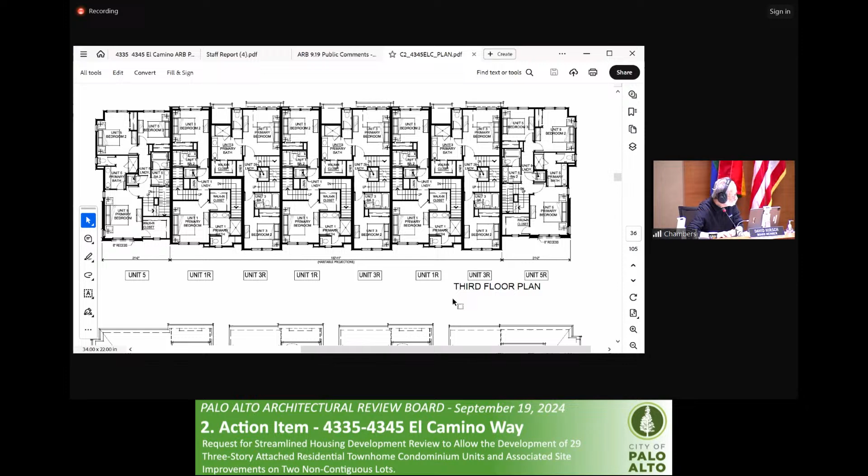Could you explain why you can't raise the ground floor units another foot? Yes, it's... actually, I asked for an explanation on this. Where's my binder?

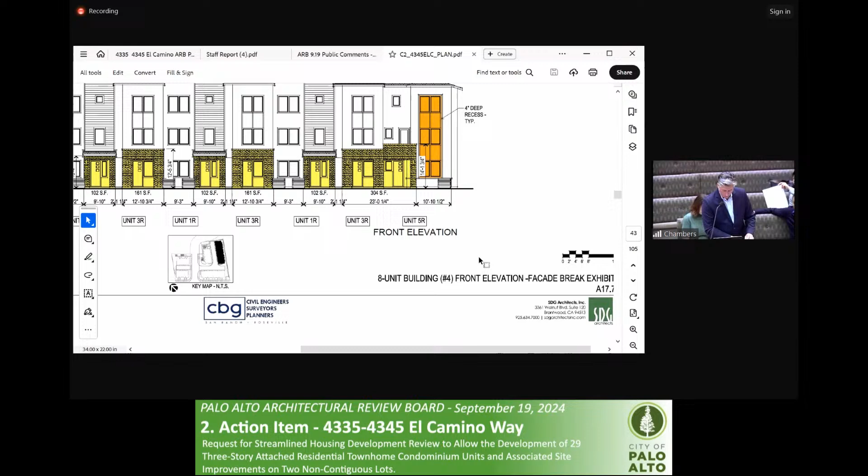Emily, if you don't mind jumping to sheet A18 or A18.1, those would be helpful for this discussion. And Ryan, if you're on, could you raise your hand on Zoom and ask to be added as a participant? Yes, there you are. Do you want to try to field this so I don't totally mess it up?

Can you hear me? As far as an engineering answer, he knows better than to let me give an engineering answer. Can you hear me? Yes. As far as raising the finished floor an extra foot, is this specific to just building 5?

No, to the whole development. It seems like it's the same question. Specifically to building 2 and I think to building 5 - yes, the two that are facing El Camino Real. The requirement doesn't apply to the other 3 buildings.

So I know building 2 was a lot closer - I think we were a couple tenths off from the requirement, but what's challenging, a grading plan or site plan would be better to utilize this. But when we take the back of walk grade, and then we set that finished floor entry, the stoops, the steps, and we raise up.

What's happening on the alley side of the project is the streets are going in the opposite direction. So maybe at one point at the building you can create that step and it works. But as you go to the low point of the building - I'll speak to building 5 in particular - the road is going to the south, whereas the grade in El Camino is going to the north. So we get this adverse relationship of pushing the building up from the back of walk along El Camino. But then when we need to catch back up on the street side, there's too great of a difference as you go through the entry, through the powder room, drop down to the 2-car garage, slope out the garage, and then get to the street.

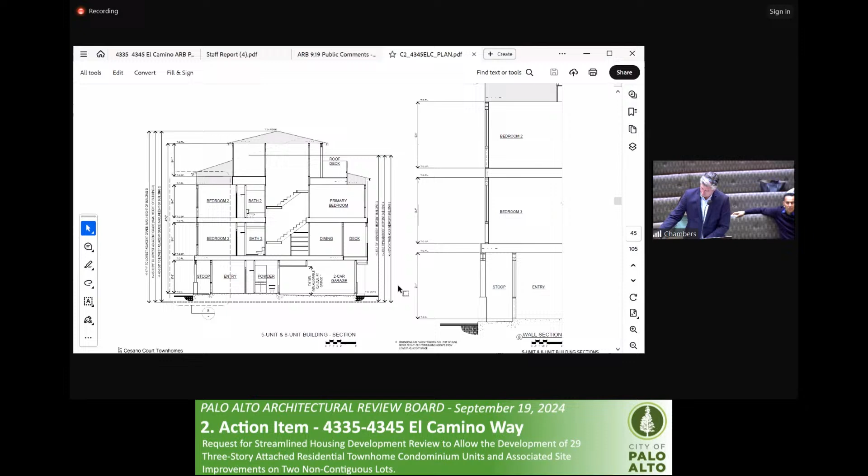And what is, board member Rosenberg, what do you - oh yeah, apologies for jumping in here - what is the difference that you were off by? Maybe that's a question for... no, I think we have it here. Building 2, we're it's 0.2 like feet short - 2/10, yeah, it's 2/10 of a foot off. Okay, I was gonna say essentially 2/10 of an inch, I can sneeze and create that.

2/10 of a foot off, yeah, okay. And that's for building 2. And for building 5, we're a little over a foot short. Or, and again, it varies along the building, so it's not consistent. So the most that we're off is 1.1 feet.

Understood, thank you. So if I could, Mr. Hickey, you develop a lot of townhomes in the peninsula - wouldn't you say that it's frequently a benefit to the residents to be somewhat elevated from the grade? Actually, I don't know that it necessarily is - it really depends on the context. A lot of folks don't like having the steps up. It sort of depends on who they expect to have living there, whether they expect to have a family member visiting frequently who - if you lived in that ground floor bedroom and you were at grade with the sidewalk on El Camino, would you find that preferable to not having some grade separation?

Well, candidly, I don't think a foot would make a difference to me. And I also think that, I mean, I see where you're coming from, and I understand that different people might have different preferences. Personally, I would rely much more on landscaping than on grade separation, because as somebody who's a little over 6 feet tall, even a 3-foot difference in grade is not going to make a difference as I'm walking down the street. Okay, I'm just trying to give you...

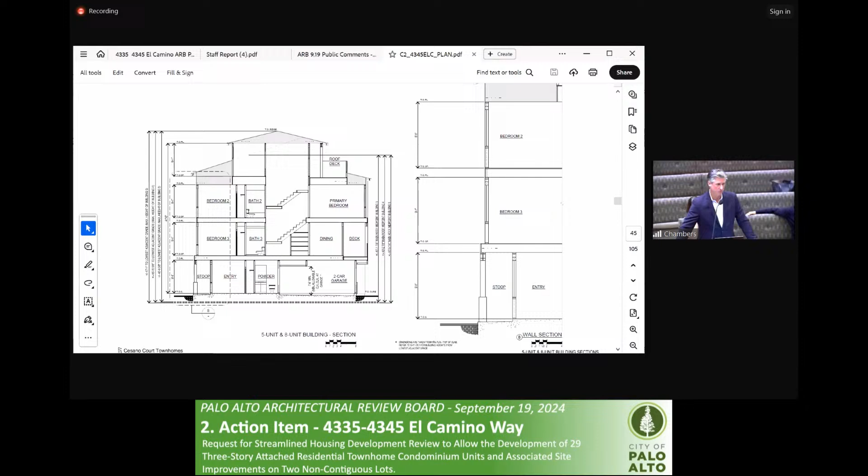We believe that's not physically possible given what we've proposed. Okay, I'd like to go to my next question, and you don't need to be involved in this one, to the staff.

We received a letter from a member of the public regarding a bicycle path. I had assumed that was something along El Camino where the sidewalks change in width. No, and I think I'm mistaken on that, but can you explain what the bicycle path is that the member of the public was talking about?

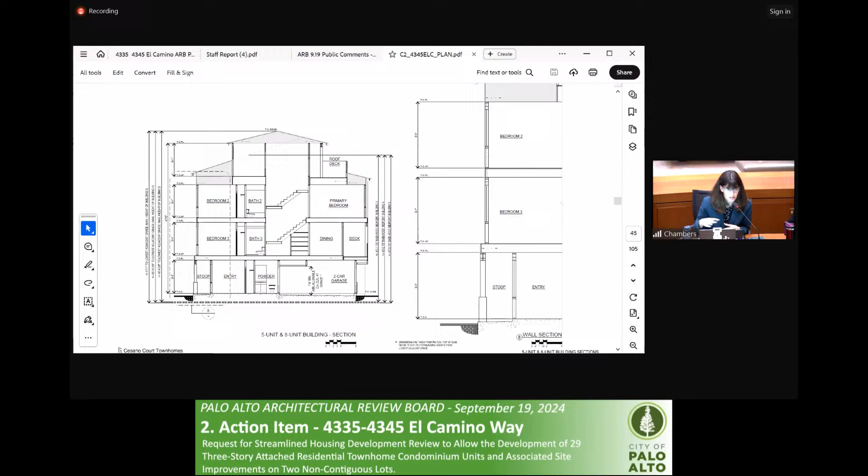Yes, I can explain that. That comment arose from when a different project was proposed on this property and went to a council pre-screening. There is a bike lane multi-use path behind the Mountain View apartment, interior to that property. It's hard to see it in the plans because where it aligns is with that common use parcel on Cesano Court, so it's actually slightly north of this project site and not shown on most of the site plans. I can pull it up in Google Maps if that would be helpful.

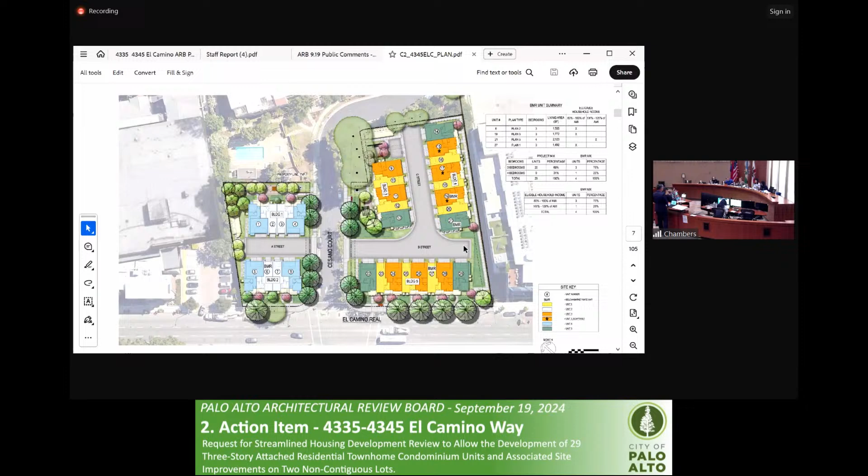Can you go to A05? I think that might be a good way to see it. I really would like to understand what's going on with that. In one of the public comments we received yesterday, there's an attached map indicating the existing path with a line and a small circle indicating the missing connection. So that attachment, if you have it in the original email, I think that would help clarify and understand that as well.

So that attachment was referring to the plans that were presented to the council pre-screening, not the plans that are presented to the ARB today.

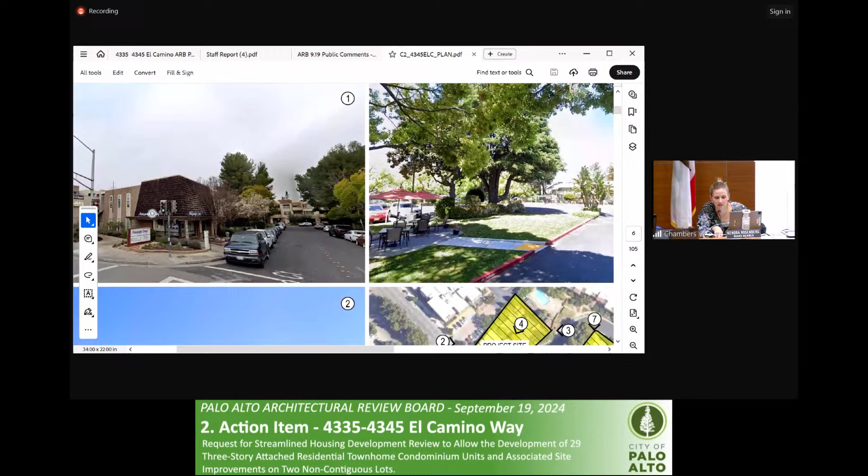Can you please zoom in on that center image? And we'll try and draw the map and see if we can explain why this is something that can't be tackled, because this is something we discussed at the pre-hearing meeting with staff, myself, and Vice Chair Chen.

So if I'm understanding correctly, that's the path right there. Yes, that's correct. It's completely off the property. Does that path connect up to Cesano Court right now? It does not, there's a fence and a bridge somewhere across here to Palo Alto if you went to the other end of that whole bicycle path, but you'd need a study of that path itself.

It's the big fence on the backside of the site. That's it, that fence is the end of the bike path. Not on the street side at all. So my question to staff then is, I gather the answer is no to this, but does the applicant have any ability to control what happens in that funny curved sliver of land?

It would obviously be better if they could get their street to access Cesano Court there as well. But if it's not their land, there's not much anybody can do to deal with it for this project, right? Correct, it's not part of their property. Has anybody explored whether easements across that are possible?

It's so clearly a public benefit to use a piece of land that will never otherwise be used, for their interest and the bicycle path's interest. It's owned by the condo HOA, so has anybody even asked the condo if that's viable to do anything with their land to mutual benefit?

Okay, so as I alluded to earlier, we actually developed the site adjoining the MV apartments. And at the time, this was something that the city of Mountain View was really interested in as well, so we spent a lot of time looking at this.

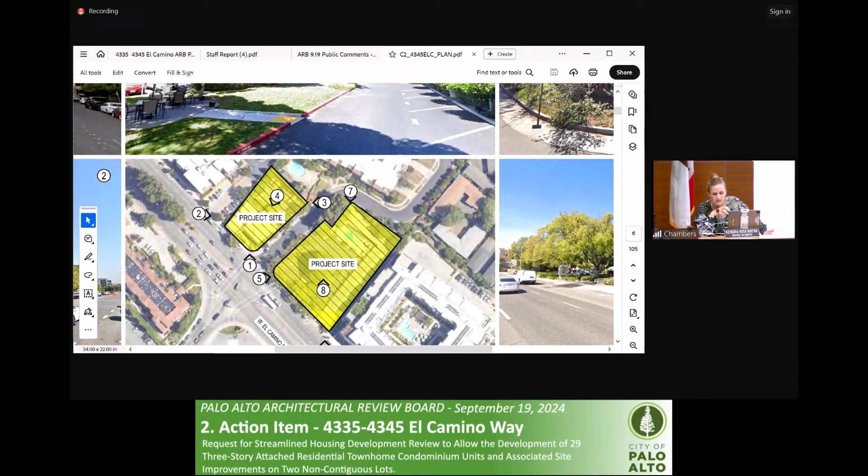We will put aside the exterior elevation commentary for a moment. I'd like to get into this now, because if this is a fundamental issue, if this project cannot be built for some reason, or there's a major issue with the overall scheme, why are we talking about color boards?

Sure, let's get into it. Just based on the language of this objective standard, it says a diversity of housing types—detached, attached, and so on—are required for projects on larger lots. And I think the lots are the question at hand. Technically, the applicant could have submitted two separate projects, but for efficiency and other reasons, they submitted one application, even though it's two separate lots. Are we parsing words on what the lot means in terms of an application?

Would we rather see this come back as two separate projects? I would rather see planning staff be more aggressive promoting overall city policies and objectives. For the folks at planning and the new members here, it's clearly debatable whether to consider this one project with two lots, or two projects—however you want to parse it. There's some grounds for variation here. Staff has never enforced this particular aspect of our objective standards about varying typologies, and developers obviously don't want to build two completely different buildings.

What Board Member Hirsch is saying is 100% correct. We need more housing in Palo Alto. We need to get to our full housing complement. This building is only 70% of it. Why haven't we pushed them harder to do more? This is one tool the planning department could use to get greater density of housing, and I think they should be making every effort to do that.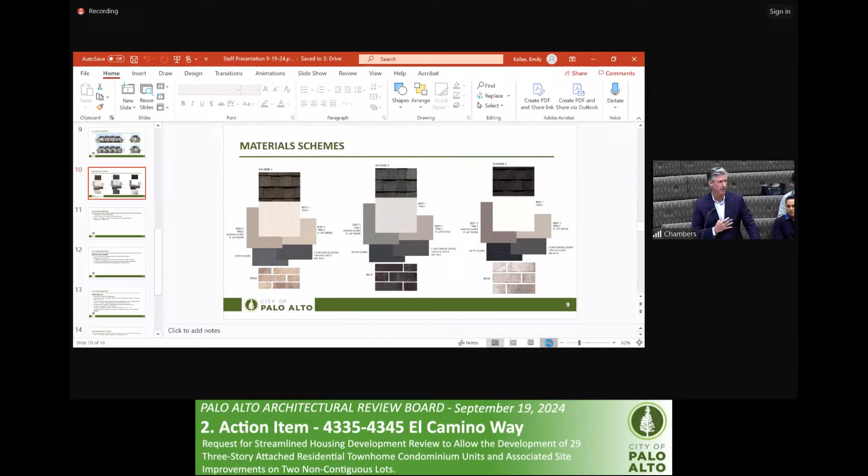Yeah, I just want to echo that—because we're the developer, she can't make all the decisions for us, but yes, it's something we look at in most of our projects. We take a look: okay, what happens if we color block them more as individual units? What happens if we try to have more of a cohesive whole? In this case, when we looked at it, we actually preferred the look we have now. It's a really subtle balance, and we know we're not going to please everybody when it comes to color. We have ongoing discussions in the office that, first of all, you've got to look at the color chips.

You can't rely on the prints. You've got to look at the color chips, and you've got to look at them in multiple different types of daylight. You can't look at them indoors, you've got to look at them outdoors and in different lights. It's funny, there are colors that look almost identical in certain lights, and then we get out in a different light and see them as very different colors. And there are other colors that look quite different, and then they look more similar.

As I said at the very beginning, we welcome feedback. If there's a clear direction from the board today, we'd very much like to hear that. We have looked at it. This is not something we just threw in and walked away from. This is something we consider as we're looking at a project, and we will continue to look at it if there are suggestions.

Can you add to this, like what scheme is for what building? Because I can't even keep track of that. If you look at A23, 23.1, and 23.2, it actually says on the lower left which scheme this applies to.

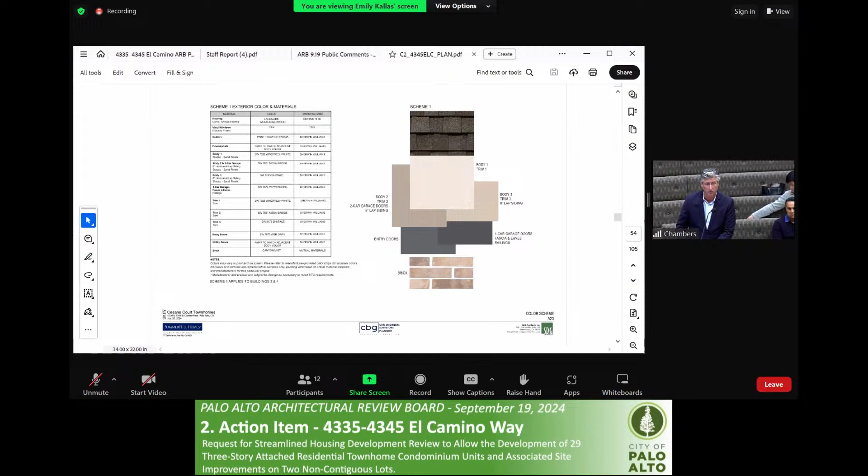For example, scheme 1, which is on A23, is on buildings 2 and 4, which would be one of the buildings on the smaller parcel facing El Camino, and building 4 is the building that faces towards the MV apartments. If you look at scheme 2, that's buildings 1 and 5. So if you're on the El Camino frontage, you'll see scheme 1 for building 2, and scheme 2 for building 5.

Scheme 3 applies to building 3. That's a different look as you're looking along Susana. So you're getting variation as you're moving around the site, but especially since the site is broken up into 2 different lots, we definitely wanted to have some sort of cohesive whole. That was the design intent.

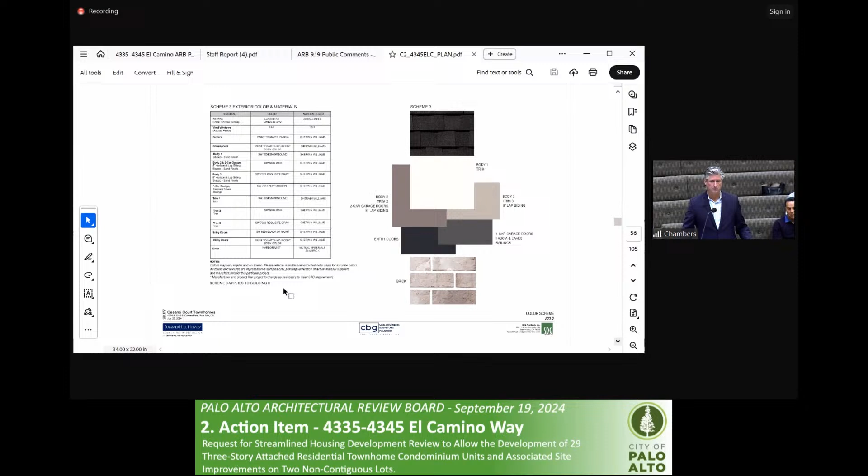Another question about finishes. There's this lovely page with all these perforated metal panels. Can you tell me what sheet that is? L9.2. Can you explain where these are supposed to go? They're not on the finished board, so I didn't know what pattern was selected and for where. I'll have Roman speak to that, he can talk about the particular locations. You can sort of see on L9.2 where one of those will go.

If you go back to the overall rendered site plan, there's a call out for it. Hold on one moment, sorry, some of the sheets. Actually, if we go to L-2.1, the enlargement, where it says dining lounge, we have the metal panels in that location behind the barbecue. The pattern of those perforated panels is shown on the enlarged image sheet, L-9.2.

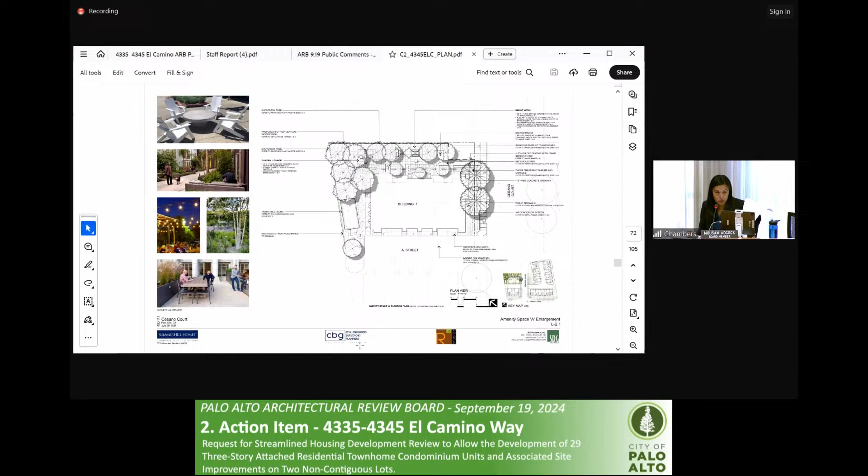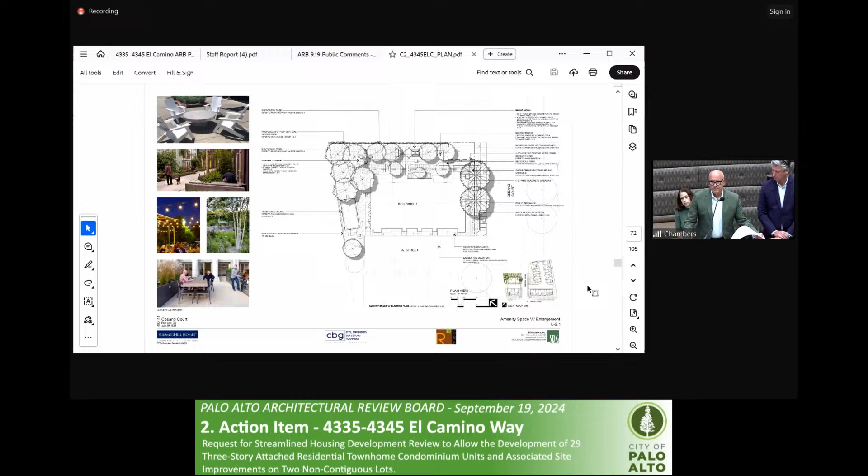So the intended pattern is kind of a gradation that's shown on the elevation, not either of the other images, those are just for idea. The elevation showing the dining lounge title, that's the pattern, and I believe the same pattern is above as an example. It would transition from more open to opaque at the bottom as shown on the elevation. The image off to the right-hand side is just to show more or less what the perforated panel product looks like.

Thank you so much for this. A question for the architect, going back to the roof schemes and all these slopes. My question is regarding the rooftop decks. That railing, I'll go to sheet 16.4 for instance. Each unit has a rooftop deck with what looks like a horizontal slat balcony edge.

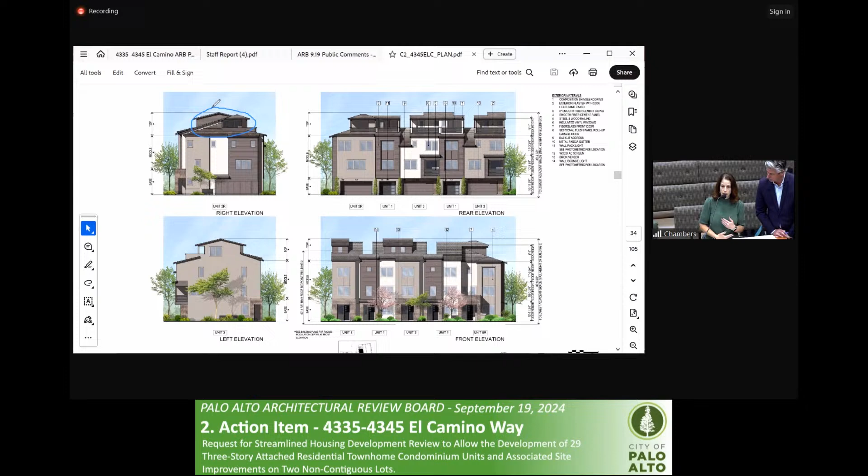What is that material, and is that also turning the corner when separating between units? It's not turning the corner. If you're looking at sheet 16.4 that you referenced, on the right elevation, it's actually horizontal siding, and that has to do with how it interfaces with the roof. You can see it on the top there at the deck: vertical slats along the rear piece of the deck, and as it turns the corner, it transitions to horizontal siding, because it's not able to have the slat railing as it's going up perpendicular to the roof slope.

And if I may, this may be part of your question - that's on the outside and between units, because we want to have privacy between the units, it doesn't turn there either.

So basically, it doesn't turn the corner between the units because there's actually a wall between the units. And how high is that wall?

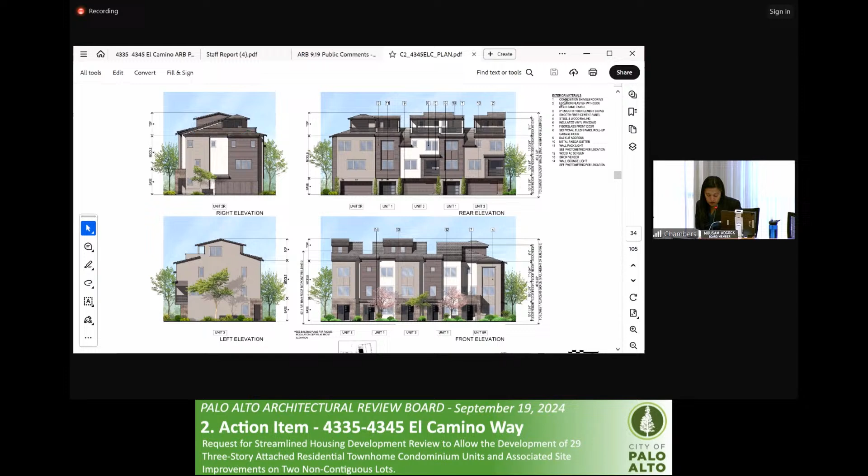If I go to page 15, I can't tell if it's railing or wall. In most cases, it's the penthouse for the stairwell. No, beyond the penthouse for the stairwell, you have two lines. So that would be like a 4-foot high wall.

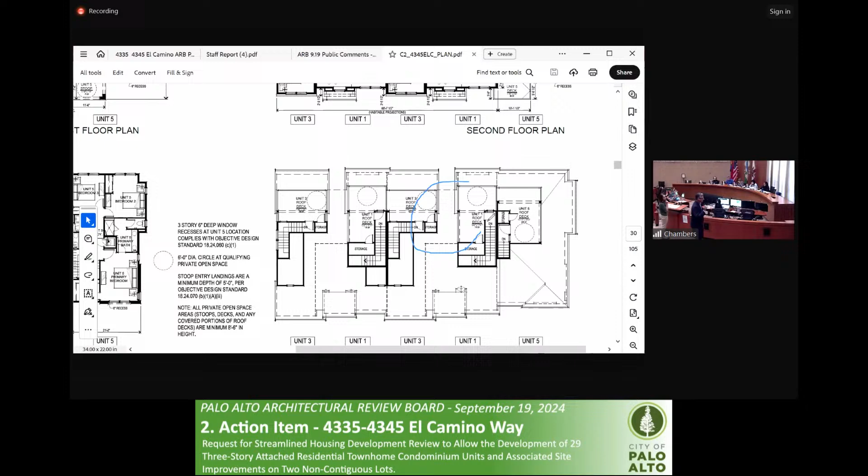Let's say between unit 1 and 3 on our screen right now, like here and here. Yes, that's the roof sloping down at 3 in 12. So if I'm sitting here and my neighbor is sitting here, they're practically sitting next to each other, and then even more, a person here and a person there are in 2 separate unit balconies.

Yes, yes. And if I may, we recognize where this question is going, and it's a tough one, right? We think about this too, because on the one hand, you want to have the privacy, and you do have that because that's not the full deck.

You do have certainly a much more private space. On the flip side, we could put up potentially some sort of screen there. The downside is how that looks. Sometimes that isn't necessarily a great look, and so we're trying to strike a balance on it.

I'm just spitballing here, but I wonder if we could even use a screen that's similar to something that we're using in the landscape screening.

Pretty sure we have in our objective standards pretty clear guidelines on what we'd like to see in Palo Alto, which is anything below 5 feet needs at least 50% transparency. I remember we went through this in great detail a couple of years ago.

So there's a lot of guidelines for what Palo Alto would like to see. Whether you choose to do it your own way and get a waiver is up to you. That wasn't identified as something that would require a waiver, but we can check with staff. If it's something that requires more screening than we're currently providing, I don't currently see a reason why we wouldn't be able to provide that. It would be straightforward in this case.

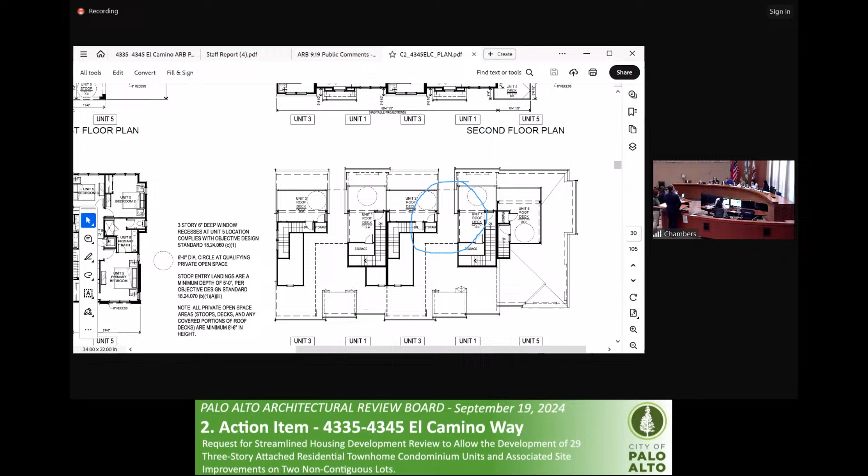We appreciate that, yeah, we'll definitely take a look. I think that's a good suggestion. I think that's all my questions about finishes and materials.